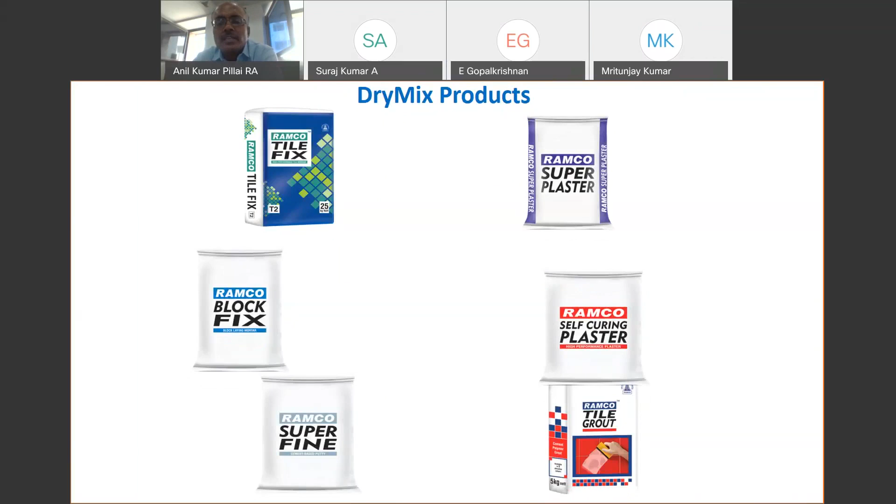And of course, we have the dry mix range of products. We have a dry mix plant at Sri Perumbudur, where we use various polymers and additives to ensure customized products are manufactured. We have Ramco Tile Fix, Ramco Super Plaster, Ramco Block Fix, Self-Curing Plaster, Tile Grout, and Superfine. Those are the dry mix range of products that we have got.

Of course, we have good interaction with various construction professionals. We have been associating with them on various projects like L&T. L&T is also executing our new plant at Kurnool, as well as they have completed our grinding unit at Odisha. That's how we are able to supply cement to projects which are exposed to different exposure conditions and which need different requirements.

That is why we always appeal to the construction professionals, that we need to understand what concrete we are going to use. Rather than limiting ourselves to the grade of concrete, we need to go into detail also - what is the workability required, what is the durability, can we measure the durability, because there are so many durability evaluating instruments available nowadays, like RCPT test and water permeability test as per DIN standard.

So those equipments can be made use of. And then we have ITD Cementation again, where we are associating with various infrastructure projects. So of course, Bangalore Metro Rail Corporation as well as other metro projects, our brand is approved, and various projects in the eastern part of the country we are catering to. So that is the kind of thing that we have got.

And we have got a research center at Chennai, because R&D being an important element, because we have seen that many construction professionals are facing problems at site. So what we do is that we do a number of concrete mix designs at our R&D lab, and try to help them out. Apart from testing various raw materials, various types of cements, and giving suggestions on how to make good concrete. Of course, the Four Leaves Award, which we have got for leadership in technology and energy efficiency, utilization of blending materials, and for those initiatives, we have got this award.

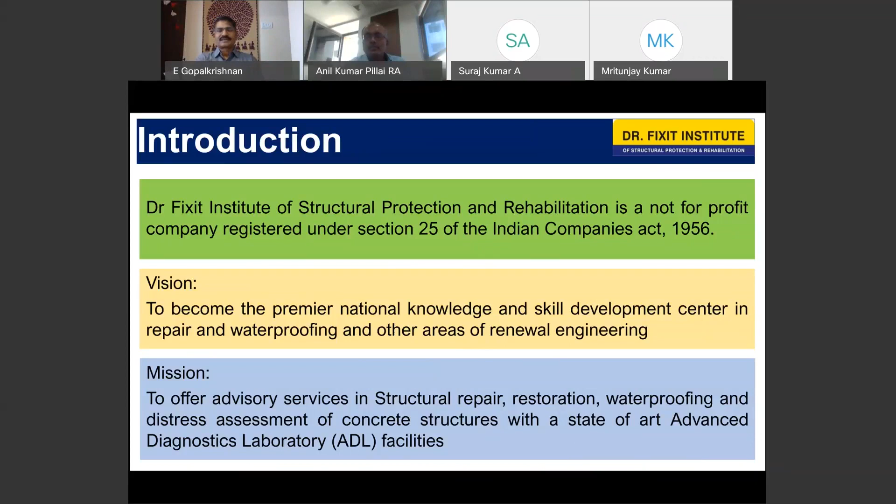What are the collaborative arrangements? We have a network nationally as well as internationally. Nationally, we have ICI and other engineering consultant chapters. Besides that, we have international association with the International Concrete Repair Institute USA, the National Roofing Contractors Association of USA, Concrete Institute of Australia, and Concrete Society UK. We share knowledge and techniques, what is developed and latest today, and we invite experts to assist us in special projects or deliver technical topics where our fraternity also gets advanced knowledge of what is happening across the globe.

We conduct petrography examination of deteriorated concrete. Non-destructive testing alone will not give much information, so petrography gives information on fire-damaged concrete structures or deterioration, the reason for deterioration, whether the matrix bonding is proper or not, and the mineralogy of the material used - everything we can identify through petrographic examination.

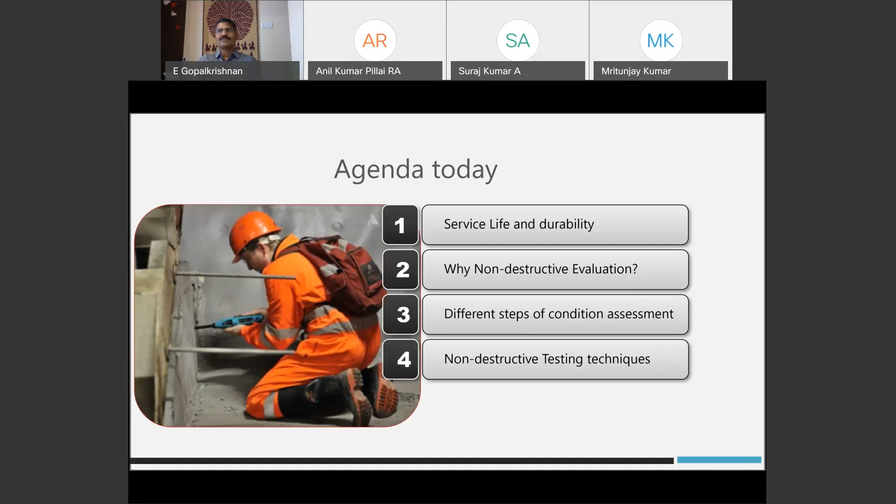Today we'll be discussing the service life and durability factors which affect buildings. Second, why non-destructive evaluation is required - because many of us still doubt, when construction is done with good quality and better workmanship, why we need evaluation? We are going to discuss that. Third, different steps of condition assessment of structures and advanced non-destructive testing techniques, their benefits, and some interesting case studies I've seen, which I want to share with you to complete our topic today.

The service life of a material can be assessed by the expected lifetime or acceptable period of usage. For a long time, concrete was considered a very durable material requiring little or no maintenance. However, many structures around the world have shown deterioration during the past 60 to 70 years.

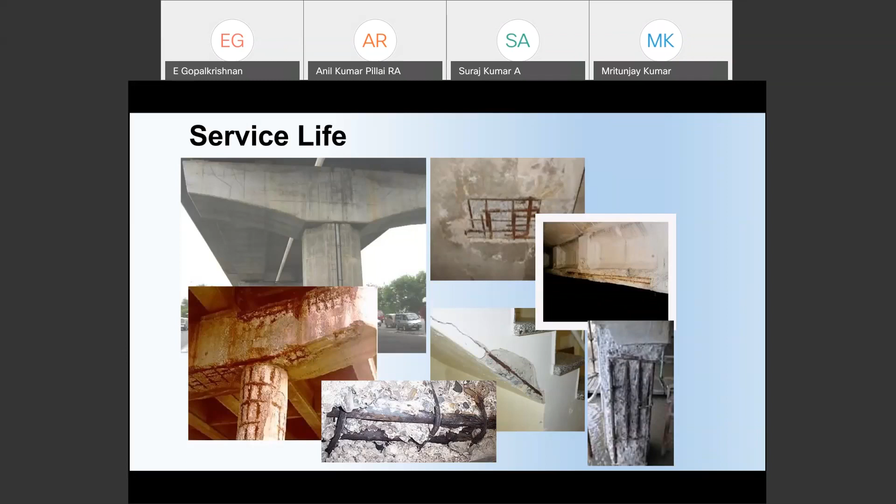What is the reason? Based on exposure condition, structures deteriorate. Different structures have different service lives. Most structures do not attain their service life because of poor maintenance. When talking about service life - without any major maintenance or repair, the building has to stand for its functionality. That is the service life.

What are the factors? As per IS 456, durable concrete is one that performs satisfactorily in the working environment during the anticipated exposure condition and during its service life. That was the definition given in IS 456.

Durability is affected by different parameters like carbonation, chloride risk, alkali silica reaction, freeze-thaw action, which is not applicable to our country. Durability is mainly related to corrosion, chemical attack, alkali silica reactivity, and delayed ettringite formation. We can say there is a multiple transport mechanism - hazardous chemicals like chloride, sulfate, or gases entering the structures along with moisture starts the formation of corrosion, etc.

The second point is selection of raw material - this is also very important, including the mixes and criteria to meet durability requirements. Also, we rarely check the actual structure specimens; we check a part of the sample collected and maintained in a cube under controlled environment. So that is also performance-based durability. We should think about that.

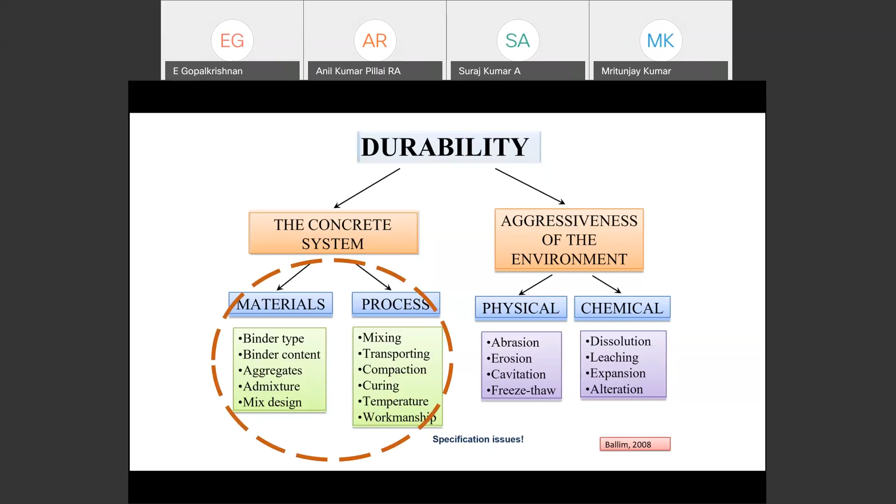But in spite of all the precautions and preventions, concrete deteriorates in severe and extremely severe exposure conditions. So while the root cause of deterioration needs to be ascertained, now I am going to show you the schematic stages of corrosion-induced deterioration of concrete structures. In this, I can bring out what the corrosion mechanism or deterioration mechanism is.

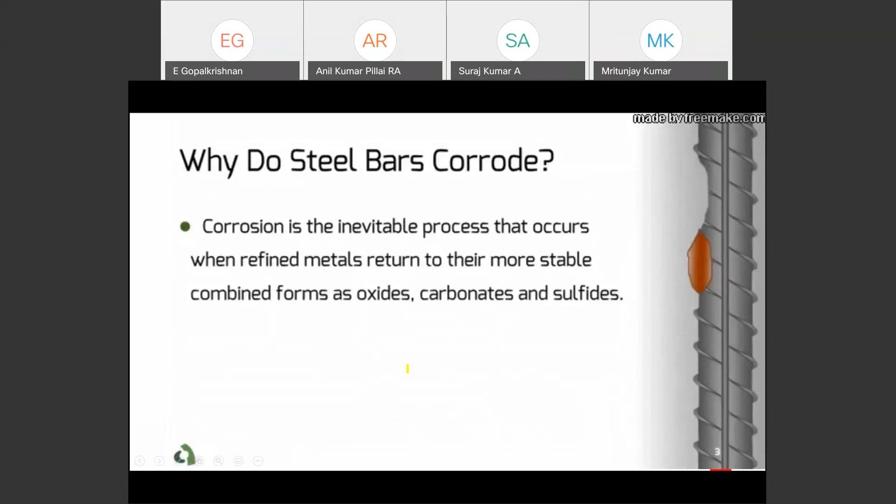Corrosion is a process or chemical reaction where refined metals such as steel and iron return to their more stable combined forms as oxides, carbonates, or sulfides. In this chemical reaction, a section of the steel material acts as an anode, meaning the steel loses electrons.

On the other hand, another portion of the reinforcing mesh acts as a cathode. At the cathode, oxygen combines with water and electrons to release hydroxide ions. This shows that the reaction requires both water and oxygen to occur. The volume of corrosion products, especially Fe2O3, is significantly higher than the original steel, which increases internal pressure and consequently cracks the concrete.

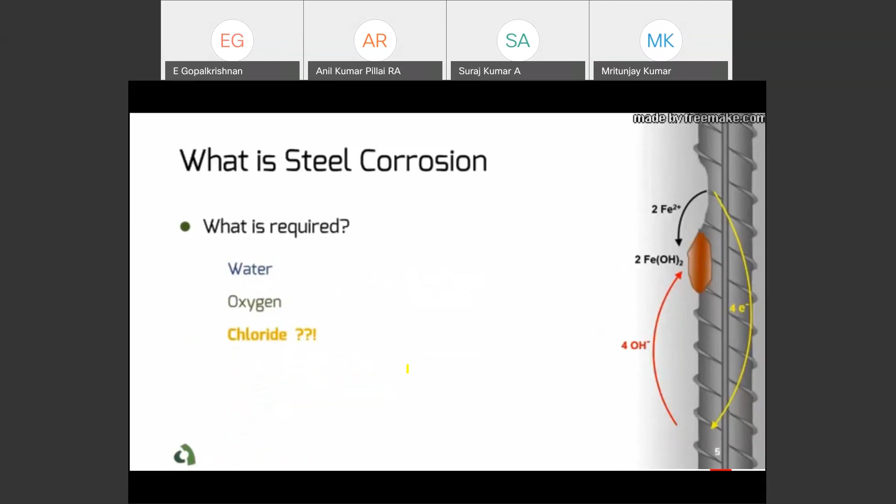We know that the availability of these three elements is essential for corrosion to happen - the reaction requires water and oxygen. However, experiments in real case scenarios show that chloride plays a key role in the onset of corrosion. Concrete provides a high alkalinity environment around the reinforcement. In normal conditions, one can expect this will protect the reinforcing bars from corrosion. At the same time, concrete is a permeable material, as moisture and aggressive ions can move through the pore structure of concrete.

The interesting question that arises here is the role of chloride ions in this reaction. This has been the topic of research for many corrosion specialists around the world, yet there is no definite answer. A basic explanation is that the ingress of chloride destroys the protective oxide layer on the surface of the rebar, which eventually destabilizes the protective film over the reinforcement, leading to the initiation of corrosion.

As mentioned earlier, the porosity of concrete makes it possible for ions to penetrate into concrete and makes the concrete itself act as an electrolyte. Corrosion happens in this environment, and the movement of electrons in concrete creates an electrical potential field inside the concrete over the surface of the rebar. For example, reactions at the anode, where steel loses electrons, can create a potential difference of negative 780 millivolts compared to a standard copper sulfate electrode. The cathodic reactions would result in a potential difference of positive 160 millivolts.

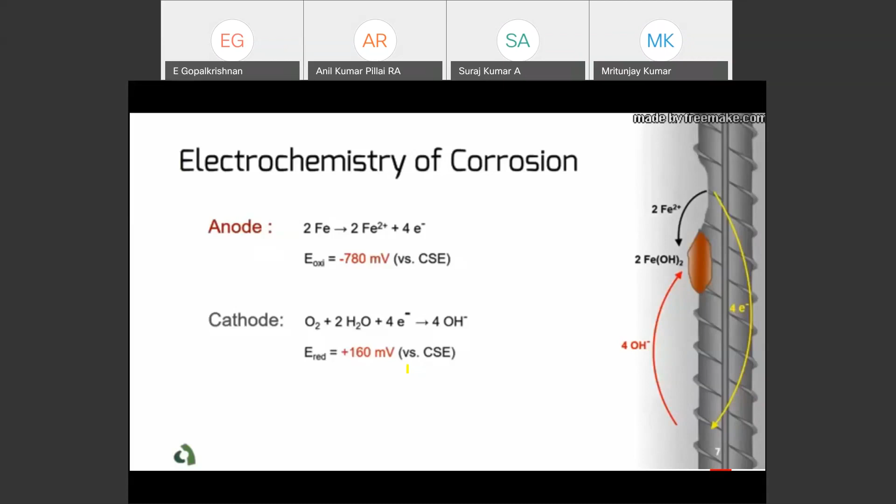The traditional way of investigating corrosion is visual inspection. However, when damage is detected in visual inspection, it is already too late. Signs of corrosion are often marked by delamination, which is the result of corrosion materials expanding. Visual inspection is often performed with chain dragging tests to identify delaminated areas. At this stage, there is not much left to do except repair.

Corrosion activity is often the focus of corrosion study. The first concept is the half-cell potential.

In this method, surface potential measurement is used to predict the probability of corrosion. While the test provides useful information about the chance of corrosion for the area under investigation, the results can easily become misleading if the potential effects of influencing parameters are not appropriately taken into account. Another limitation of the test is that it does not provide any information about the kinetics of corrosion reactions.

The second concept is the rate of steel corrosion. The corrosion rate is about the kinetics of reaction and how fast the corrosion is progressing in the concrete. This becomes important in the context of life cycle assessment, as it helps engineers better predict the remaining service life of a given structure. So let's talk a little about these concepts and measurement test methods.

The half-cell test can be used to predict the corrosion potential from the surface of concrete. Several associations have standardized the test procedure, including ASTM, UNI, and RILEM. In the half-cell potential method, the potential values at the surface of concrete are measured with respect to a reference point.

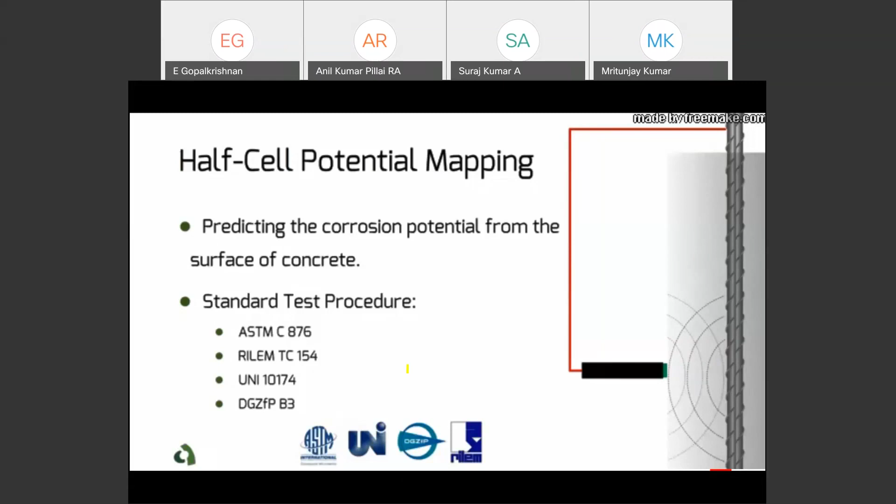The value is normally presented in contour plots, showing different half-cell potential values. This helps identify areas with a higher chance of corrosion. For example, ASTM C876 introduces 3 different ranges for the measurement.

Half-cell potential values less than negative 350 millivolts, measured in reference to a copper sulfate electrode, represent an area where the probability of having active corrosion is more than 90%. When measurement is higher than negative 200 millivolts, this probability is less than 10%. Results for half-cell potential values between negative 200 millivolts and negative 350 millivolts are uncertain.

We have seen what corrosion is and how it's affecting the structures. Now let us see the assessment of structures today. There are different types of assessment: strength assessment for assessing the concrete strength, durability assessment for identifying the nature and extent of observed or suspected deterioration related to reinforcement corrosion, and integrity assessment for determination of localized integrity of the structure or generalized assessment of behavior of old structures.

For the old structure, we can assess the integrity of the structure, what is the status of the condition, etc. There are 5 steps of condition assessment.

One, we conduct a detailed visual inspection. What is the deterioration shown? What are the cracks? What different deterioration is happening to the structures? And the second one, based on the visual inspection, we identify what NDT is required.

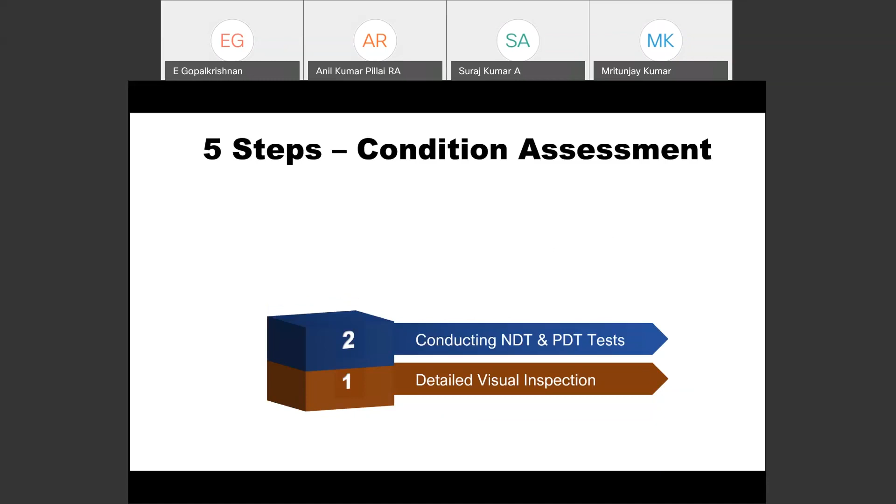NDT is always a group of NDT tests, to give information about the structure which is not visible. So some non-destructive tests and partially destructive tests are also conducted, like taking a core and other tests which are partially damaging. And whatever sample is collected, we conduct some chemical analysis and lab tests and interpret the results of the non-destructive evaluation.

Finally, we prepare the report with recommendations, including the severity of the deterioration and what strengthening measures are required. In totality, with the rate analysis, we submit to the customer so the client comes to know what the problem is and what budget needs to be allocated. So everything is there, and they can successfully repair those particular structures to extend the life and durability. Okay, this is all the condition assessment.

Let us go to non-destructive testing. Recently, non-destructive testing is most frequently used for evaluation and condition assessment of buildings. The non-destructive evaluation of civil engineering structures in reinforced concrete is becoming an increasingly important role in the field of structural engineering.

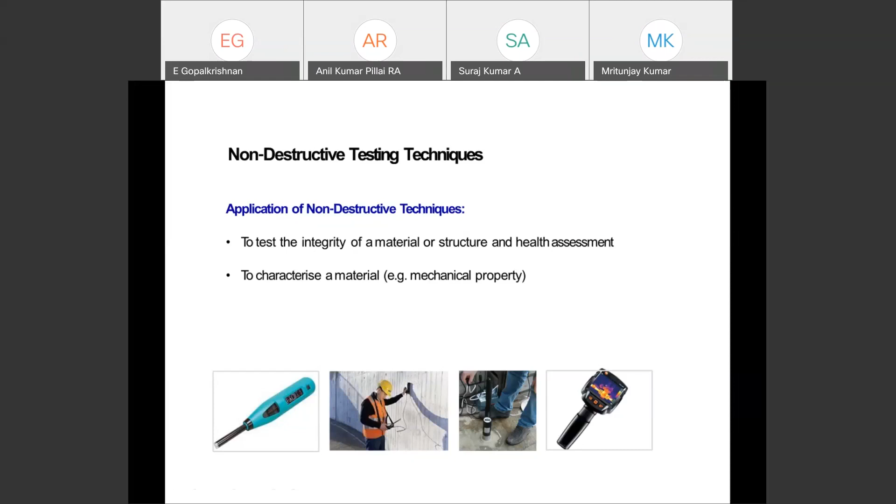For assessing the integrity of material or conducting health assessments, we use several non-destructive testing methods. I'm going to explain these. We will review the potential options and practical solutions for on-site evaluation of concrete strength in RCC structures. The rebound hammer, as you all know, is one of the very simple and low-cost tests, which is most widely used in non-destructive testing of concrete.

As you know the principle, if you hit a hard, dense surface, you get a higher rebound number. When you have a rough surface or a soft, porous surface, you get a low rebound number.

The operation is shown here, so I'm not going to take much time on this. When you get the reading, you can see the rebound number on the sliding scale, so we can report the rebound number.

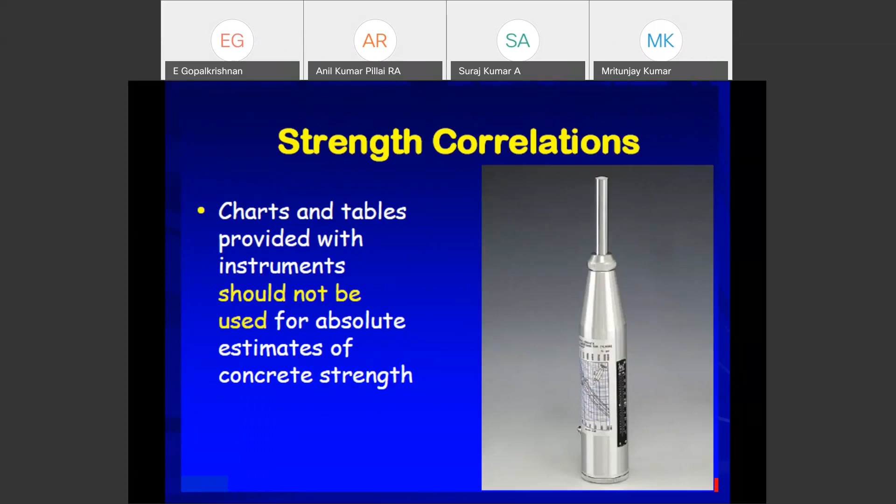The chart and tables provided in the instrument should not be used for absolute estimate of compressive strength. With traditional rebound hammers, we need to correct the angles, horizontal, vertical down, vertical up, to have the correct rebound number values.

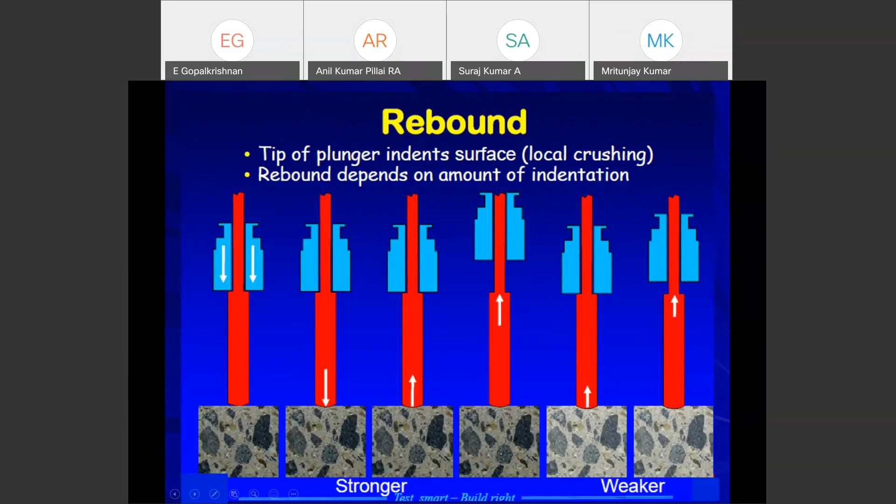It depends upon the stronger surface. You can get a higher rebound number because of the indentation, and a weaker surface gives a lower reading. Normally, we take the average of 6 readings and report as the rebound number, because it's affected by several factors: surface condition, presence of rebars, and presence of subsurface voids can affect the result. Even a carbonated dry surface can get a higher rebound value compared to normal. We need to understand this while interpreting the results.

Just running the video so we can cover this. In this video, we'll be covering a quick review of the rebound hammer testing method.

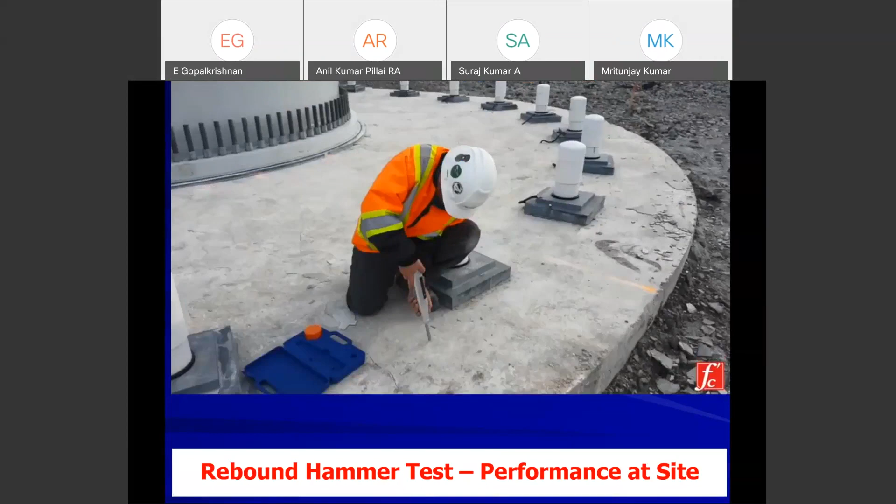Since its introduction in 1948, the rebound hammer has become extremely popular, mainly for its simplicity and ease of use. It is an inexpensive and quick method for non-destructive testing evaluation of concrete hardness. The main applications for the rebound hammer are to assess the in-place uniformity of concrete and to estimate the in-place strength of concrete if a correlation is developed.

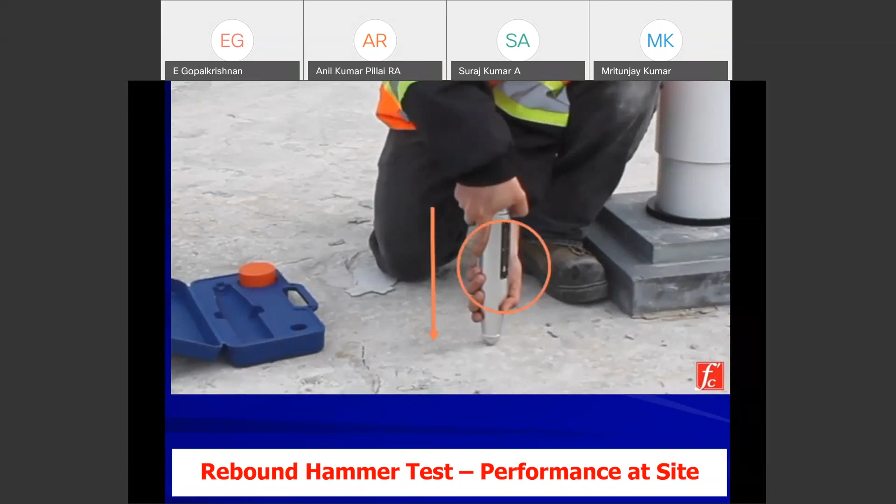In order to test, the plunger is pushed against the concrete perpendicular to the surface. As the hammer body is pushed towards the concrete, the force causes the latch to release and make an impact on the concrete. Essentially, the rebound is measured.

After its impact with the concrete surface, the output of the rebound hammer is then referred to as the rebound number, and this is correlated with the surface hardness of concrete. A higher R number means higher concrete hardness.

The rebound hammer can be placed in many configurations, including upwards, downwards, at any intermediate angle, and horizontal. Inspectors should pay attention to the following considerations prior to conducting a rebound hammer test.

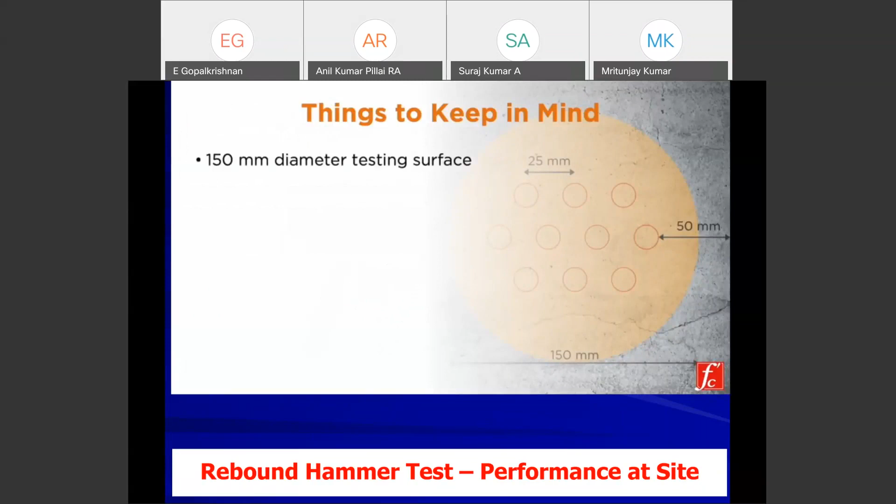The testing surface should be at least 150 millimeters in diameter. The surface should also always be smooth before testing. If there is any free moisture or water on the concrete surface, it must be removed. And finally, it's important not to test on frozen concrete, since frozen concrete tends to have high rebound numbers. Concrete should only be tested after it has thawed.

Although the rebound hammer provides a quick, inexpensive means of checking the uniformity of concrete, the results can also be affected by the following parameters: smoothness of the test surface, size, shape, and rigidity of the specimens, age of test specimens, surface and internal moisture conditions of the concrete, type of coarse aggregate, type of cement, carbonation of the concrete surface, and type of mold.

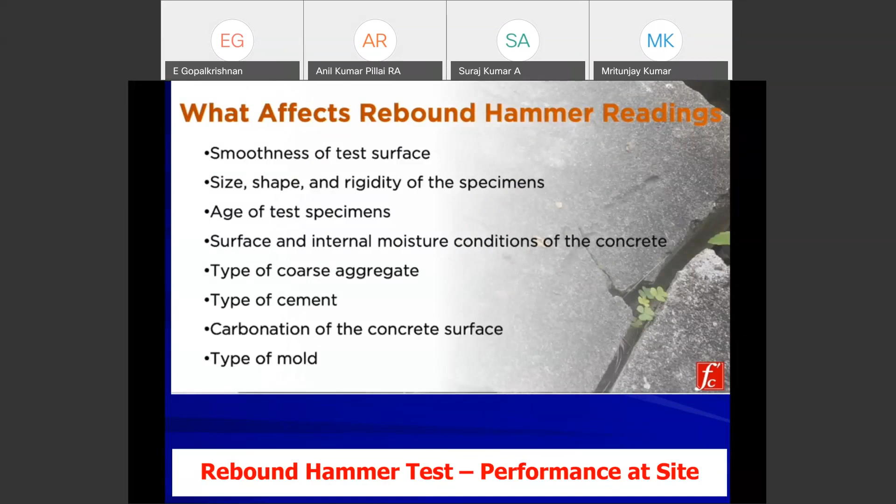With recent advancement in sensor technology and development of wireless communication, a new generation of rebound hammers are commercially available. Recording and tracking job-specific details, including hammer angle and on-site verification of test results, was time-consuming and prone to errors. The new generation of hammers help engineers get around these issues. For example, new generation hammers apply real-time checks on the quality of datasets and do not need to be adjusted for the configuration of the hammer.

In this video, we heard about the new generation hammers, since everybody is familiar with the basic test. There is a Silver Schmidt, which is a new latest development that gives the Q value. There is a difference between this and the R value, which you used to get in the conventional instrument. So for the same concrete, the Q value is not equal to the R value.

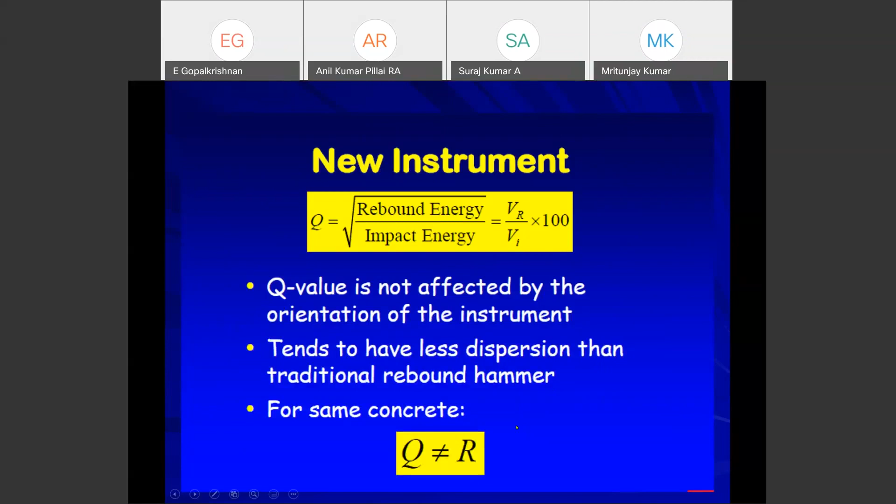When you compare the latest one, both correlate to the compressive strength. However, the original Schmidt hammer can measure 10 MPa to 70 MPa, whereas the new one can measure 5 MPa to 100 MPa, increasing the lower and higher limits by 50%.

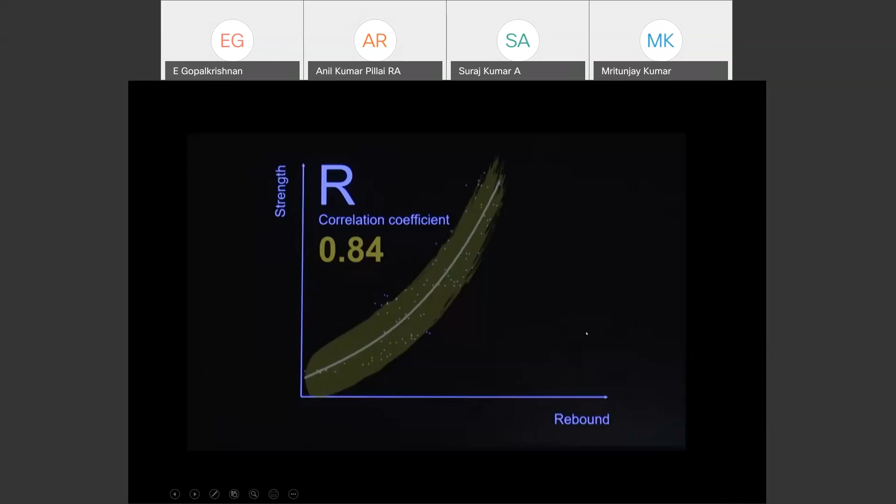Now, what is the coefficient of correlation? 0.84 for the silver Schmidt, and we can see that the latest Q value will give a 0.97 coefficient of correlation compared to the R value, which is 0.84.

Overall, this rebound hammer minimizes the total number of cores taken, so that we can assess the quality of the concrete, and also ensure that when collecting samples in representative and investigated structures, we get the correct information. This we can do quickly and non-destructively using the rebound hammer.

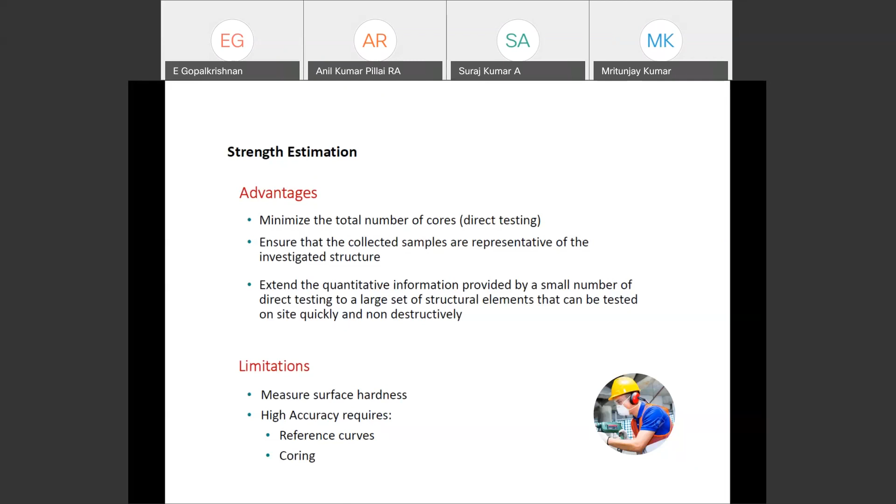The limitations are there. We need to assess the surface hardness only, and it gives high accuracy results when you have the reference curve, or from core samples we can get a closer prediction of the compressive strength.

Next one, the ultrasonic pulse velocity is another interesting method. It works effectively for quality control of concrete material and detection of damage in structural components. This has traditionally been used for quality control of material, mostly homogeneous materials such as metal welded connections. With recent developments in transducer technology, the test has been widely accepted in testing concrete material also.

The principle, you all know, is usually applied in a concrete element to understand the uniformity of the concrete and detect damage in the structural component. The ultrasonic testing of concrete is an effective way for quality assessment and uniformity, and it can also be used for crack depth estimation, which I am going to talk about today.

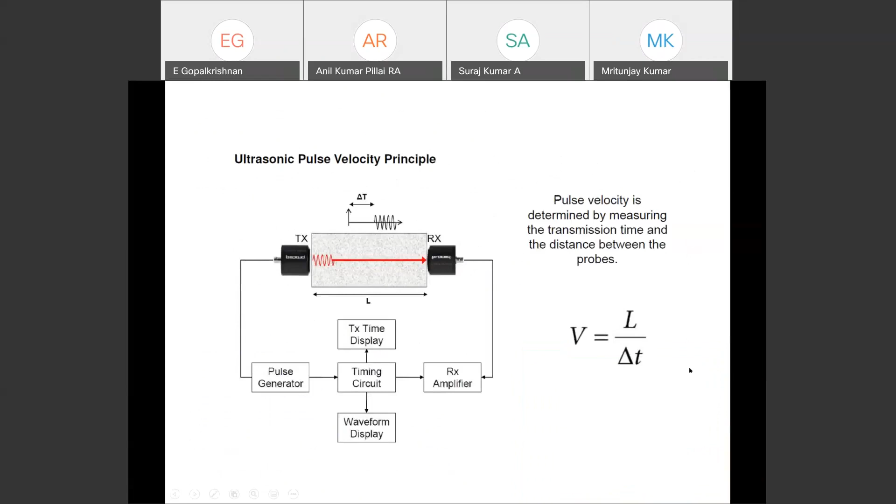The principle is through the transmission time, measuring the distance between the probes, giving the distance over the travel time, giving the velocity reported in kilometers per second. It's used for detection of voids, cracks, and other internal imperfections or defects, and for estimating mechanical or structural properties of material such as porosity, density, strength, or elastic modulus.

There are different types of testing arrangements: direct, semi-direct, and surface probing. Surface probing is not an easy thing to interpret; only advanced users are able to interpret the surface probing results.

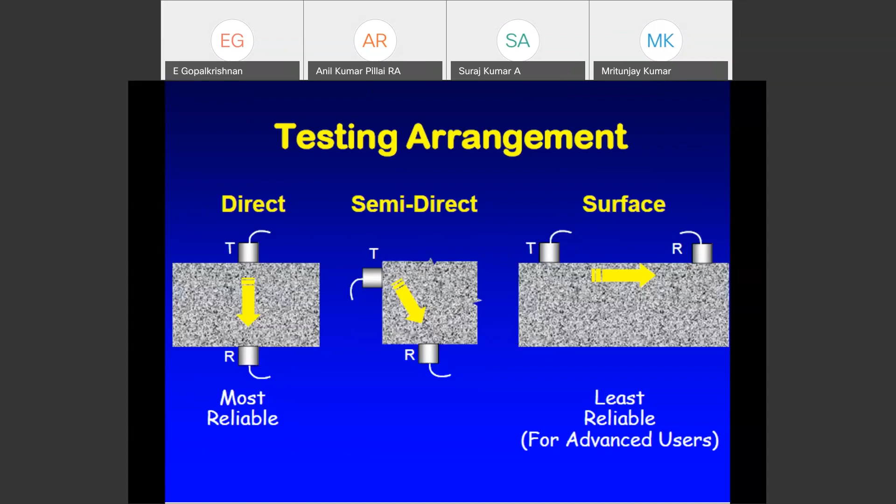Presence of defects increases the travel time, resulting in a lower computed speed. Like when honeycombing is there, the travel time is higher, so you get a low velocity. When a crack is there, it is not going to show, or it will not give any reading at all when the crack is thrown through. So we need to understand the defects through this testing.

As per IS 516, the latest revised code, above 4.4 km per second is excellent, below 3 is poor. Now we can see two examples: the high quality concrete, where the surface is smooth and dense, gives a high pulse velocity above 4.4 km per second. The poor quality concrete, where voids and honeycombs are present, gives a velocity lower than 3.0 km per second.

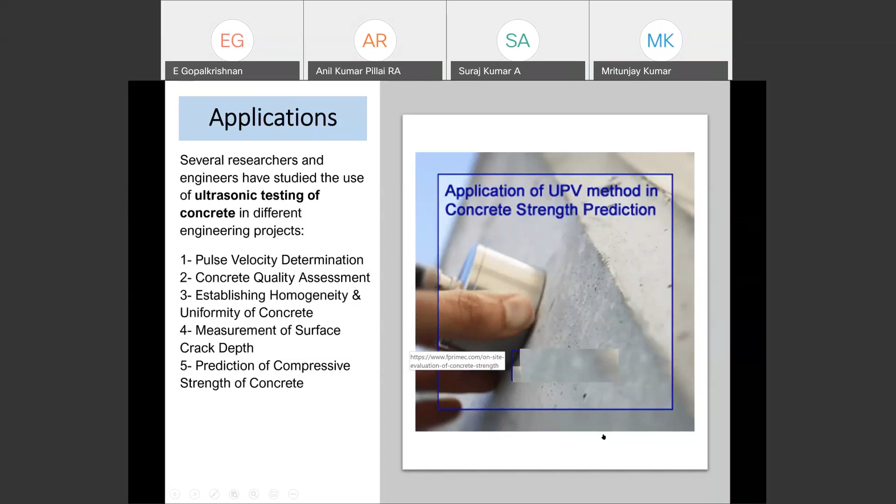Its application is not only pulse velocity determination; it can be used for quality assessment, homogeneity, uniformity of concrete, measuring surface crack depth, and prediction of compressive strength of concrete. We can use it to understand these parameters.

The evaluation of cracks: usually crack width is used to assess the severity of the cracks, whereas crack depth is used to evaluate the overall structural integrity of the element.

So one is understanding the crack: when we use a simple crack width measuring scale, we can see what the crack width is. What about the depth of the crack? Crack depth measurement can help repair contractors in evaluating the repair cost, and site engineers also rely on different institutional methods of non-destructive testing to estimate the crack depth.

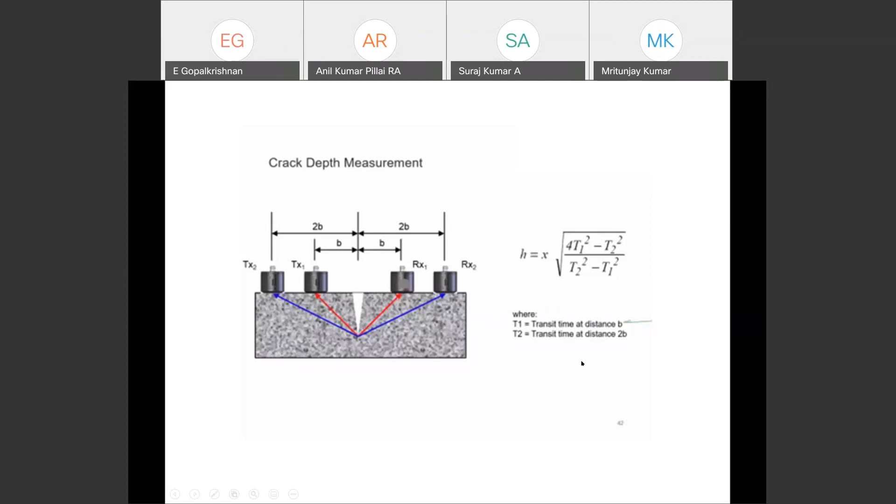There are two methods used. This is a way we can measure the crack depth, covering the transit time between points above the crack - the travel time to distance B and 2B. We use this formula. For a better understanding, I can show an audio-visual to help you understand it much easier.

One approach is simply extracting the core and visually examining the core holes and core for the possible cause of the crack. In another method, we use NDT, like ultrasonic pulse velocity, to understand or measure the depth of the crack, for determining cracks.

We're just going to have a quick look at determining depth of crack in concrete. Able to see the probe - we are able to see. The probe is used here to measure the depth of the crack. Let us have a look at it. Measurement mode.

Now there's a number of selections here, because we've selected crack, so we're already in that mode. Here's dimension B, which is 10 centimeters, 100 millimeters. That's how far we are either side of the crack, and twice that. So this is 100 millimeters and 200 millimeters, or 10 centimeters and 20 centimeters. There's our 10, 10, 10, 10, etc.

So I'm just going to put some couplant on the ground in line with this. Let's put a coupling, and a bit of coupling with those spacings. Now I need to make the first measurement here. I'm going to put the two transducers, one transducer there, one transducer here. They're not actually on the tape, they're just next to the tape. I think you'll be able to see how the transducer is placed.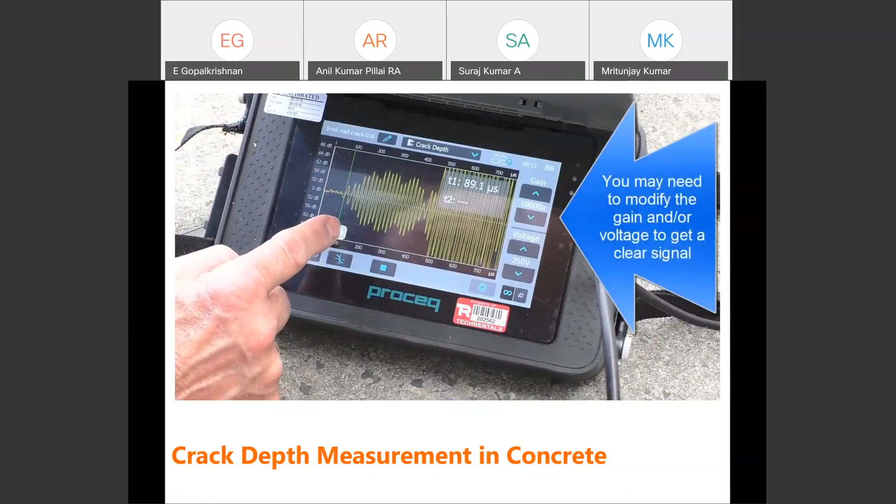First I'm going to hit play. Here, this is auto mode, where it automatically jumps and automatically finds it, etc. Now I'm going to just move that, because I can see quite clearly that the signal is actually received. It's actually there. So I'm going to select that.

Now, next thing I'm going to do, I'm going to jump to the second set of measurements. So I'll move my two transducers there. Yeah, we can move further away. And take parallel readings. There.

Now, two measurements. We now hit this play button again. Now this isn't jumping. Oh sorry, hang on, I just hit something by accident there. I need to go back out. I hit zoom in and hit that plus button. So I'm going to set it back to auto mode.

Now, it's jumped to that spot, but I can see quite clearly that the nice clean sine wave starts a little bit earlier than that. So I'm going to move it back, and I can actually see the sine wave is really just starting there. I can see that pretty clearly. So now I hit finish on that, and it's got a crack depth of 44 millimeters. So it's that simple, that quick to find your depth of cracks in concrete. Nice little instrument, thank you very much for determining that.

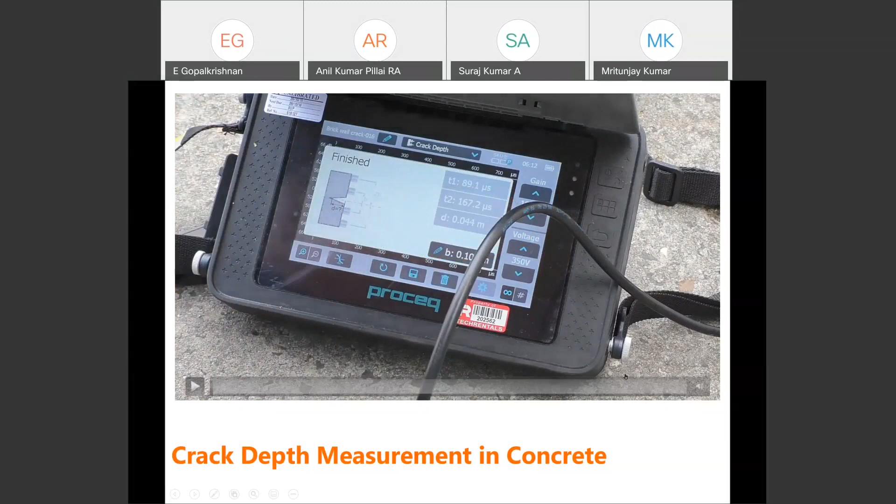So the crack depth is not typically uniform throughout the length of the crack. You can see there is a zigzag pattern. So we need to measure at different intervals so that we can take an average to understand the crack depth of a particular crack. You can see there are different points. We are measuring at each point so that we can have an average that will represent that particular crack.

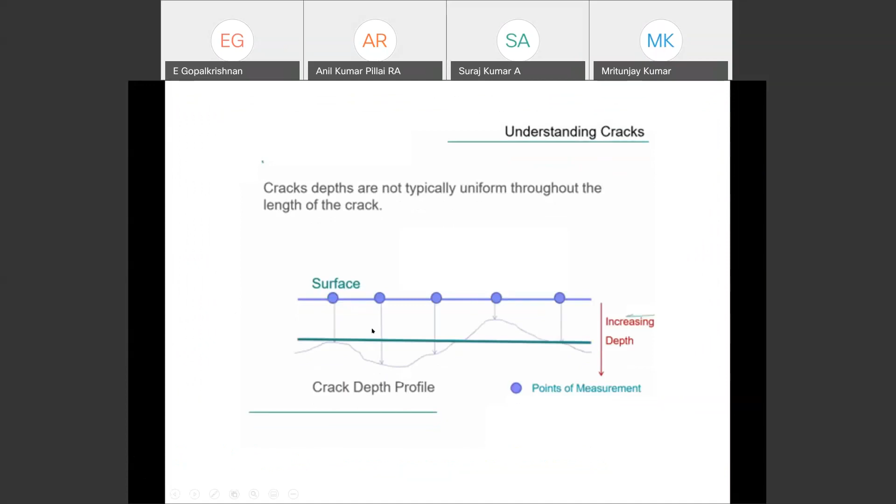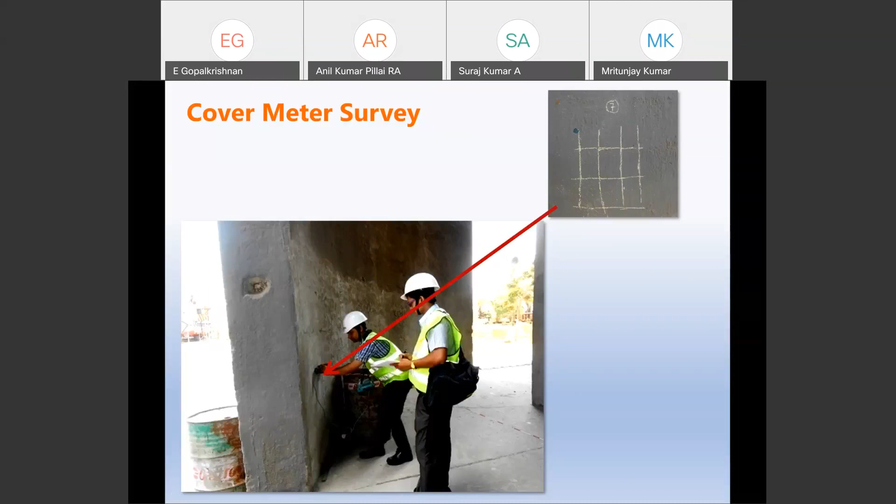Now, second one, we are talking about the cover meter, which usually works on the eddy current principle. It measures the cover, and also detects the rebar diameter and locations. This is one of the measurements we can make where no drawing is available. We use the cover meter to identify the rebar position and the thickness, size of the rebar, which will definitely help give protection to the structures without cutting it open. So the advantage is it can measure the accurate cover and estimate the rebar diameter.

What are the limitations? There are limitations. Yes, only the top layer can be detected. In congested areas we may not be able to identify the exact thickness. These are limitations we should understand.

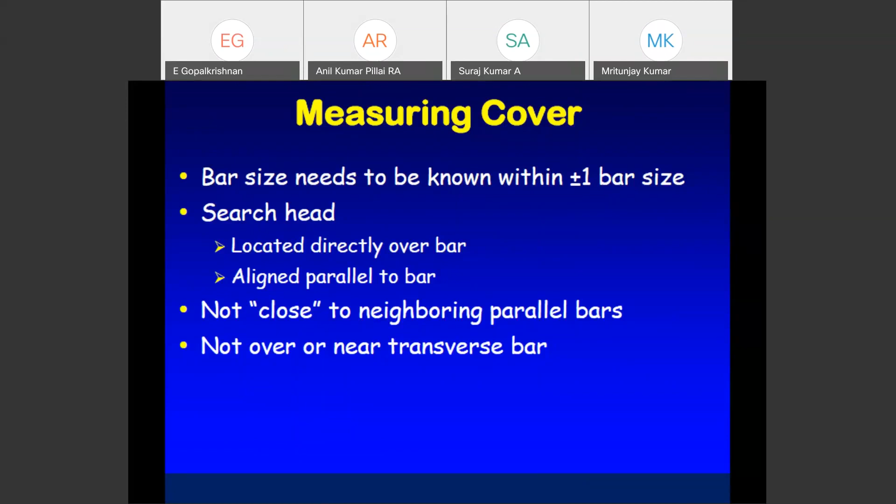So when you are measuring, the bar size needs to be known within plus or minus 1 bar size. And you need to keep the sensor of the equipment directly over the bar, aligned parallel to the bar, not close to parallel to a neighboring bar, or near a transverse bar. It will give misleading results.

The next one: when you are doing the assessment of the structures, we conduct the carbonation test, which is a very simple test.

So whether the carbonation level reaches the reinforcement, or what is the depth of the carbonation - simply we use the phenolphthalein indicator to try to do that, and also check the pH, as a chemical method, to see whether the status of the carbonation has started or not. This will help to strengthen the finding through the carbonation.

When the pH drops below 8.5, the passive iron oxide film breaks down and rapid corrosion occurs in the presence of moisture and oxygen, as you know.

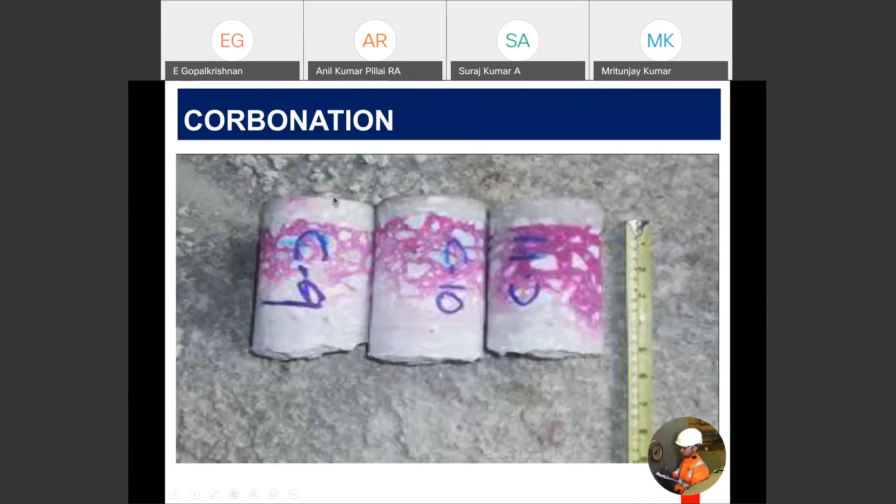So we are trying to measure the carbonation. When you take the core from the particular structure, we can measure which area's color has turned, while the rest of the area shows pink. From the surface, we can measure what is the depth of carbonation from the surface, and we report.

The important aspect is corrosion. Corrosion is commonly observed in existing reinforced concrete structures. When performing structural or condition assessment, engineers need to find proper answers to questions like: what is the current state of the structure? What is the rate of corrosion happening? What is the remaining capacity and service life? It all depends upon the corrosion activity.

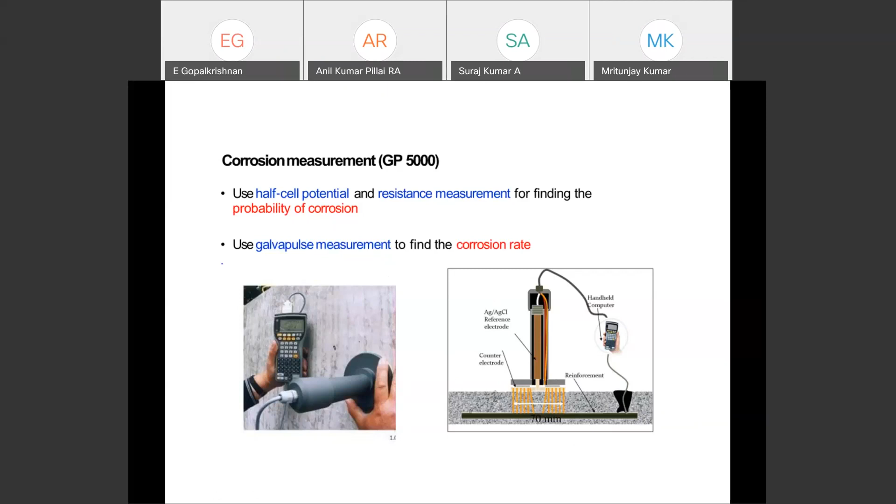We use corrosion measurement using this GP 5000. It gives the half-cell potential reading as well as the resistance measurement to find out the possibility of corrosion and also to find out the rate of corrosion. So this is the information we can get. Here, normally the half-cell potential electrode uses a copper sulfate solution, but here we are using silver chloride, which allows a more accurate assessment to be made.

So we are measuring the corrosion rate or half-cell potential of the reinforcement embedded in concrete. Using the pulse polarization technique method, we can find out the actual corrosion rate and the time of testing, so that we can assess over time what is the corrosion and what is the increasing rate of corrosion. We can then make the actual repair plan or protection plan based on understanding the rate of corrosion.

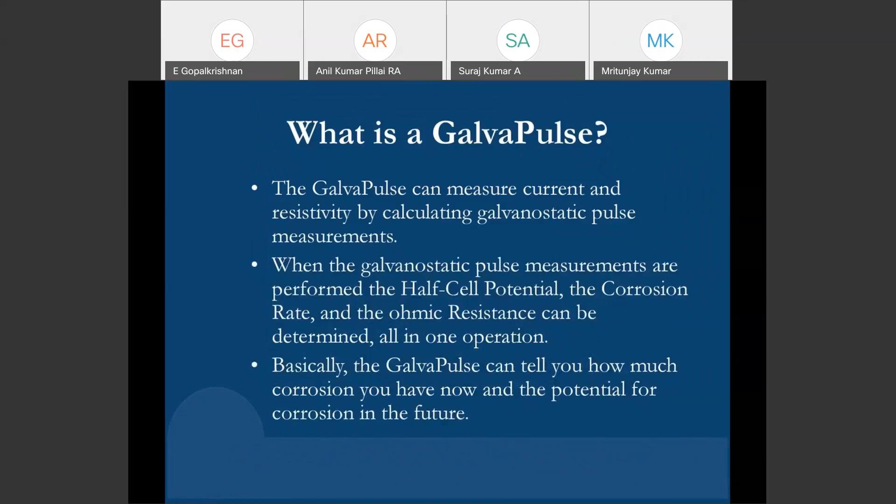This measures the corrosion rate and half-cell potential. Based on that, we can predict the lifetime of the structure - we call it the residual life of the structure. We can proactively extend the service lifespan when protecting from corrosion.

So the key parameters involved in corrosion rate estimation include the concrete material, rebar condition, humidity, and temperature. Using all this information, lifetime prediction of the concrete can be made.

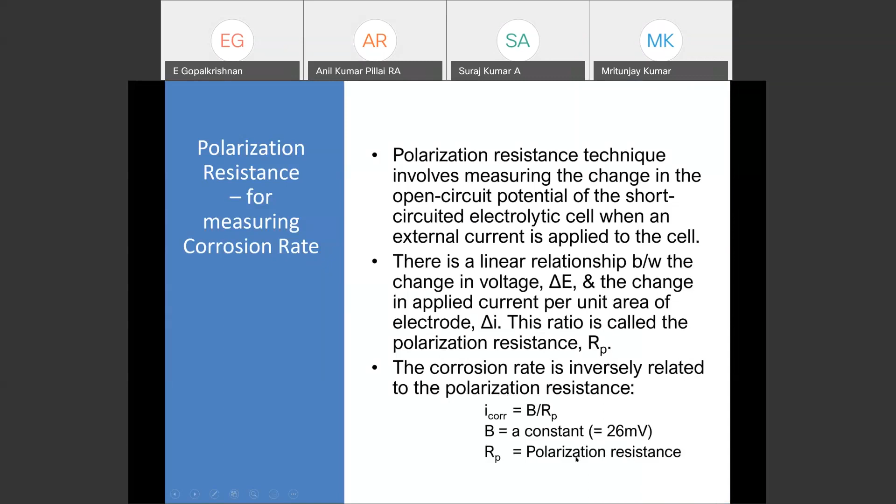This technique uses linear polarization resistance, the relationship between the changes in voltage and the changes in applied current per unit area of electrode. This ratio is called polarization resistance, RP. The formula given is I equals B divided by resistance polarization, where B is a constant and RP is the polarization resistance. We can use this formula.

The Stern-Geary corrosion rate relationship is I equals B divided by RP, in microamperes per centimeter square. B is typically 26 to 52 millivolts. Using Faraday's law, we can translate this to find the i corr: 1 microampere per centimeter square is equal to 11.6 micrometers per year.

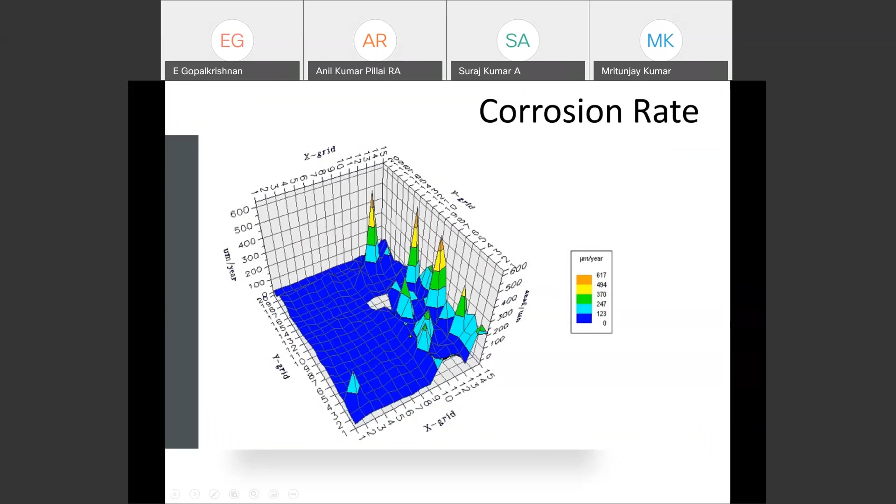So we can understand what is the corrosion rate, potential differences, as well as the amount of resistivity present in the particular structures.

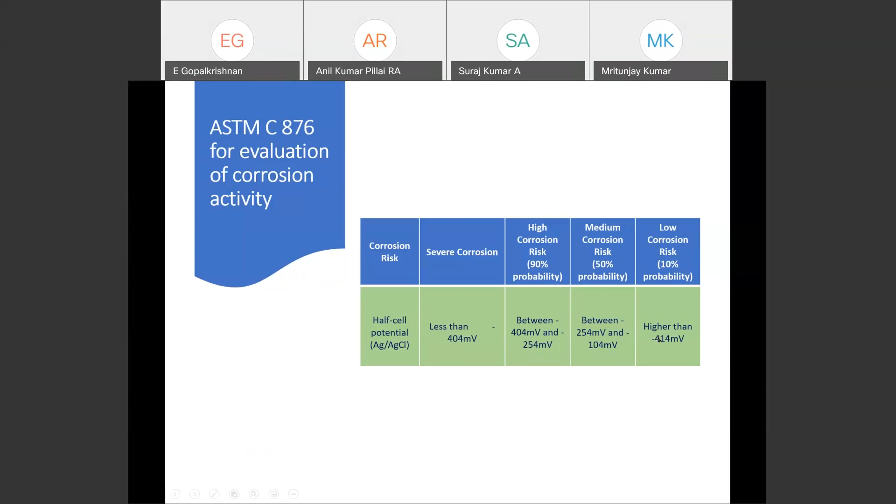There is an ASTM C876 giving the interpretation. It says severe corrosion means less than minus 404 millivolt. Low corrosion risk, 10% probability, is higher than minus 104 millivolt. It has a 10% probability of corrosion.

Based on the relationship, we can predict the residual life of the structures or corrosion-induced deterioration.

The application gives the service life estimation to understand what measures need to be taken to prevent deterioration at an early stage, and it evaluates the efficiency of corrosion arresting measures such as application of corrosion inhibitors, membranes, and electrochemical removal of chloride from the structure elements.

Condition survey of suspected RCC structures, monitoring corrosion activity in RCC structures, and measuring corrosion activity in the repair areas. Once you have the corrosion, you do the protection of the rebar and finish with the repair. After some time, you can check what corrosion activity is happening through this instrument.

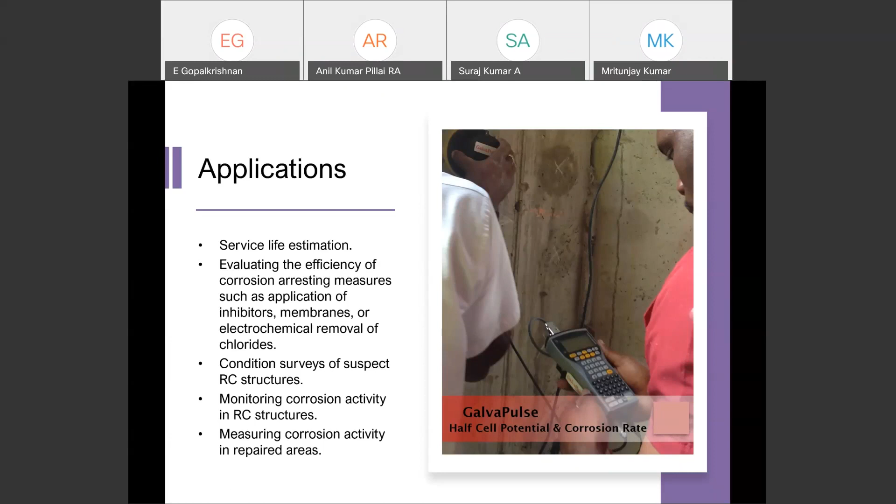We are going to talk about in-place strength without testing core. Nowadays, when there's a structure failure or any doubts, when the cube failure happens in the lab, what do we do? Immediately we order core testing. We take the core from different parts of the structure and try to do the testing. Many times we don't get a conclusion because core testing also involves several parameters affecting the results.

Extracting core, first of all, is destructive. And it not only damages concrete integrity, it might affect the reinforcing bar in RCC structures. So try to avoid the core. Taking core always has potential damage to the structures. Unknowingly, you can cut the rebar also.

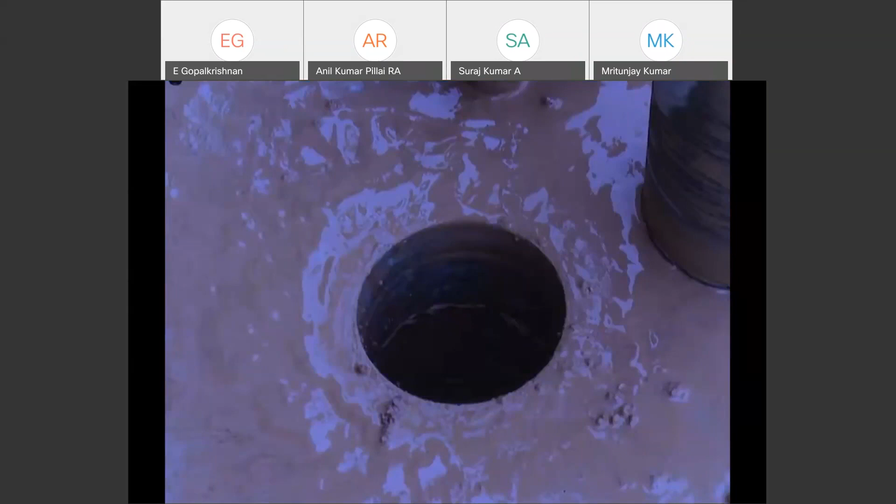Here I am giving the comparison of the duration for core testing. First we do the drilling of the core at site, then trimming the core, capping, then curing it for 48 hours before testing and crushing for strength, which almost takes 1 week.

Whereas when you do the cut and pull-out test, you only have to do the field test. It's going to take around 25 minutes to get the compressive strength or in-situ strength of the particular concrete. So it will be easy and give more accurate results, with no need to rely on cutting, trimming parallel to the core, or whether the curing is done properly. On the actual site, we can get the in-situ strength within 25 minutes. This is the advantage of this method.

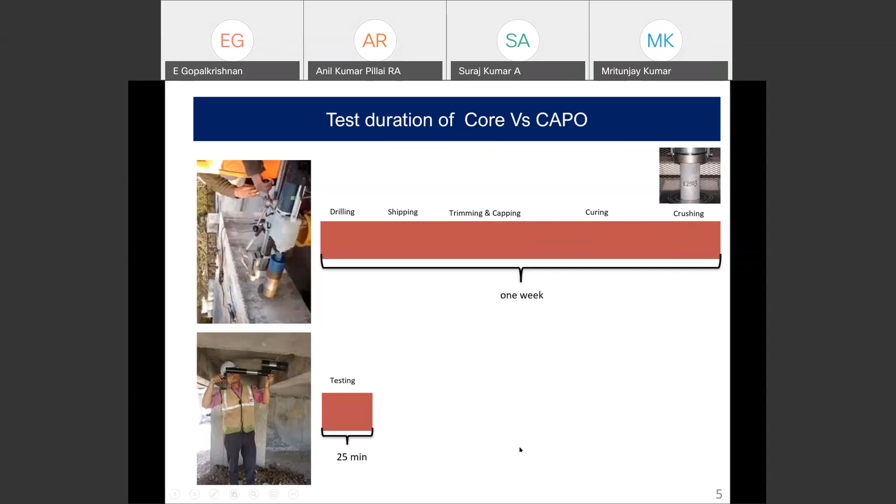Let us understand: normally when you measure in-place properties of concrete, you ensure the structure will perform as intended, and for that we need to understand the strength. Testing by core definitely takes many cores, time, and cost. Alternatively, we can do rebound number, probe penetration, or ultrasonic pulse velocity, but all these require correlation. Otherwise we do not get the actual compressive strength, so we only get an indication, not the actual value.

Better is we can use the pull-out test. We are able to get a more accurate and reliable estimation of the in-situ strength. As per ASTM C900, we can measure the force of pull-out of an insert anchored in the concrete. So we can do the cut and pull-out test.

It does not require pre-planning of test locations. It can perform the test at any accessible location. It permits testing of existing structures, with immediate results, as I showed in the first slide, compared with core testing. This is all the advantage.

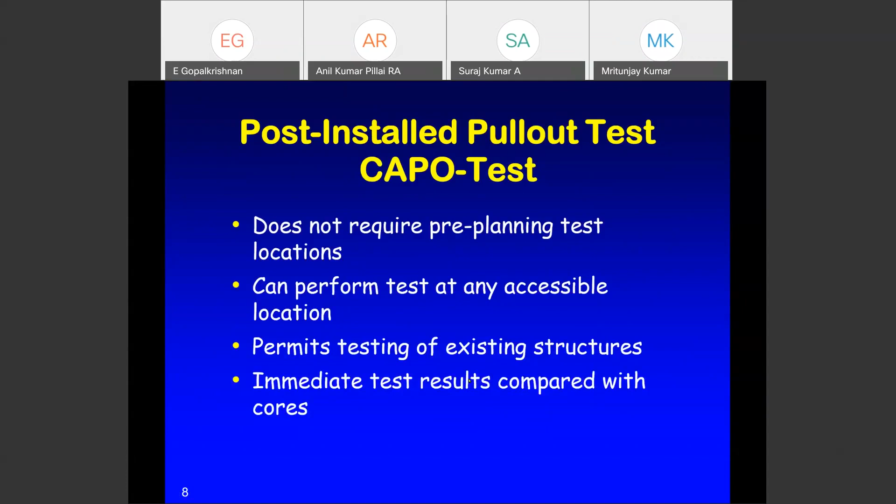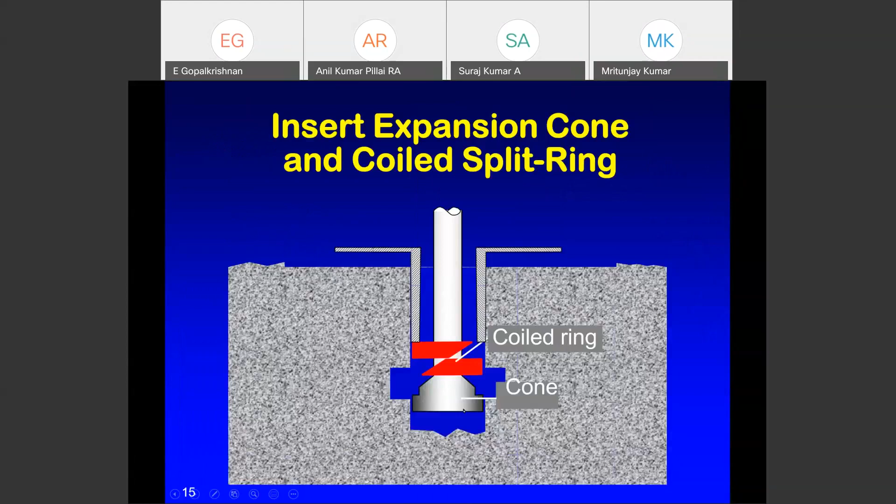I can show you the preparation of the concrete: drilling an 18 mm diameter hole, almost 65 to 70 mm deep. We insert the ring in the special slot. Surface preparation is done with a diamond edge drilling machine to achieve a smooth surface. Then we prepare the special slot with a special drill given for that, where we fix the coiled ring, which is going to expand. This coiled ring looks like that.

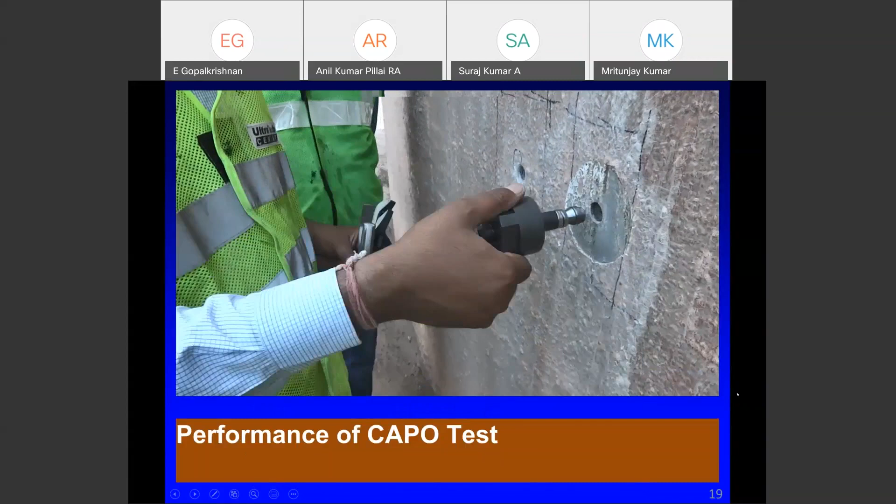We can pull it out. When pulling out, we get a break in a V-cone shape. Now I am going to show you how the test has been done in the field. There is no audio, so no need to listen for audio - we can just see the video.

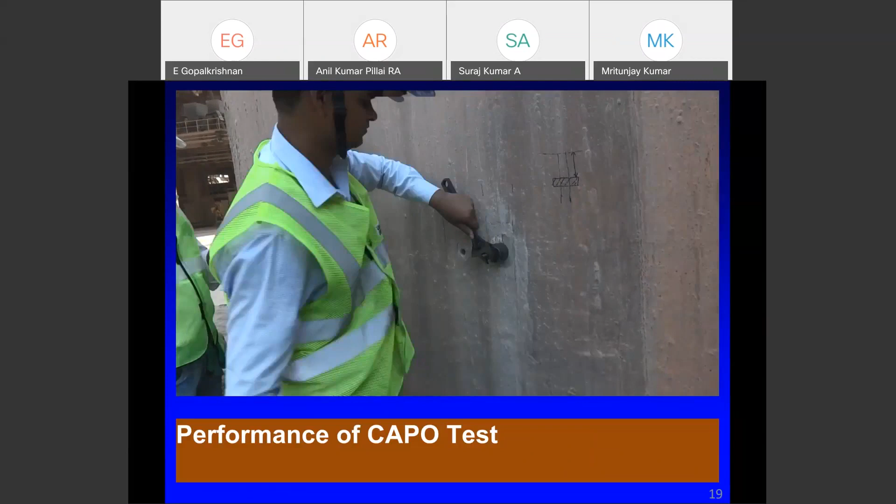The concept behind this pull-out test is the tensile force required to pull a metal disc together with a layer of concrete on the surface to which it is attached. That is related to the compression of the concrete. We are going to convert our pull-out force to the compressive strength.

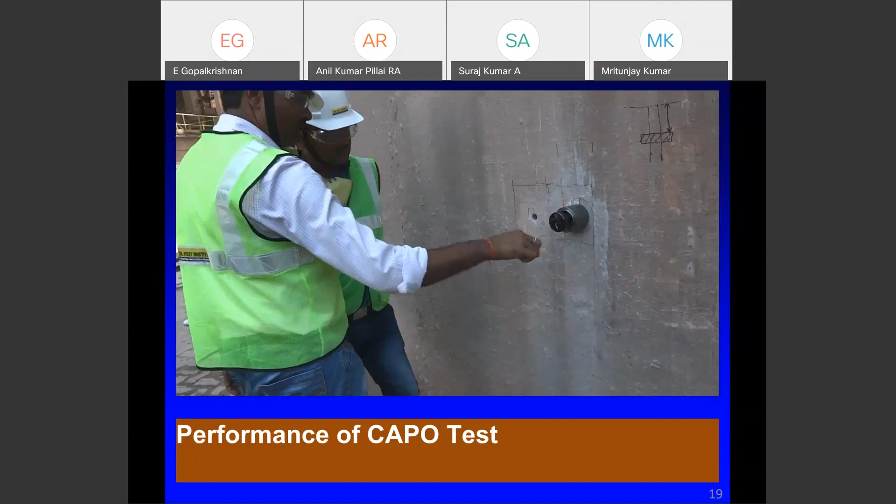Relatively easy to use. If a relationship is established, the method can deliver robust test results. We have been successfully using this in many projects.

Even nowadays, for buildings and residential buildings, consultants prefer to have pull-out tests because the damage is very minimal compared to core extraction. Nowadays we are working on lean structural members, so the core test is difficult. That's why this test is being preferred in these locations.

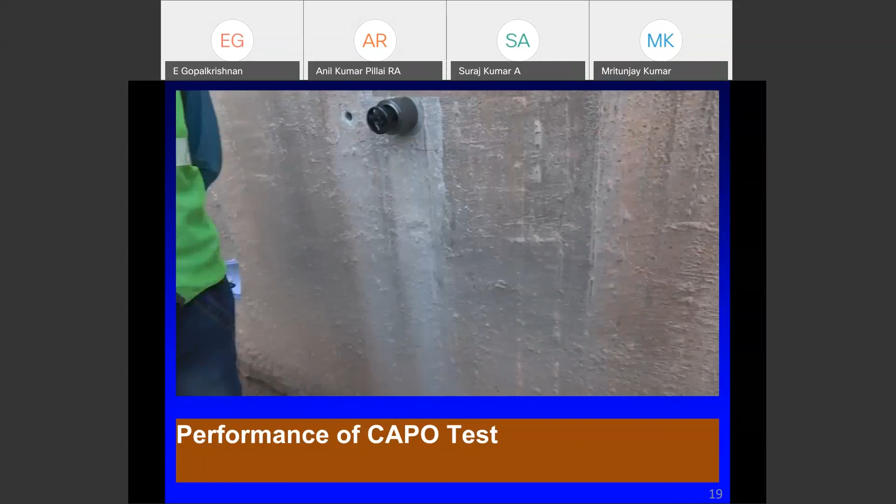Now it's showing 0, it's set to 0 now, and we are going to apply the force uniformly. What's happening is the ring which is inserted gets expanded slowly, and ultimately it will break. The ultimate force is recorded in the instrument - the pull-out force.

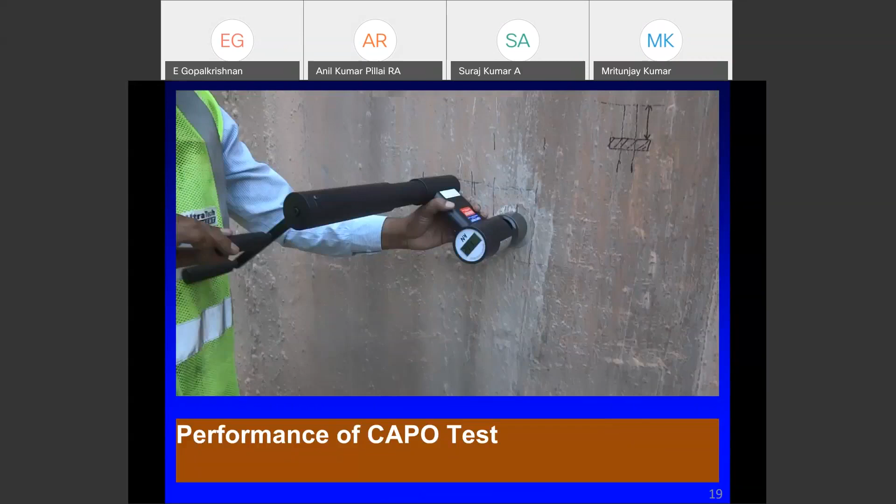So we have to apply the force carefully, uniformly. That is very, very important to have more accurate results.

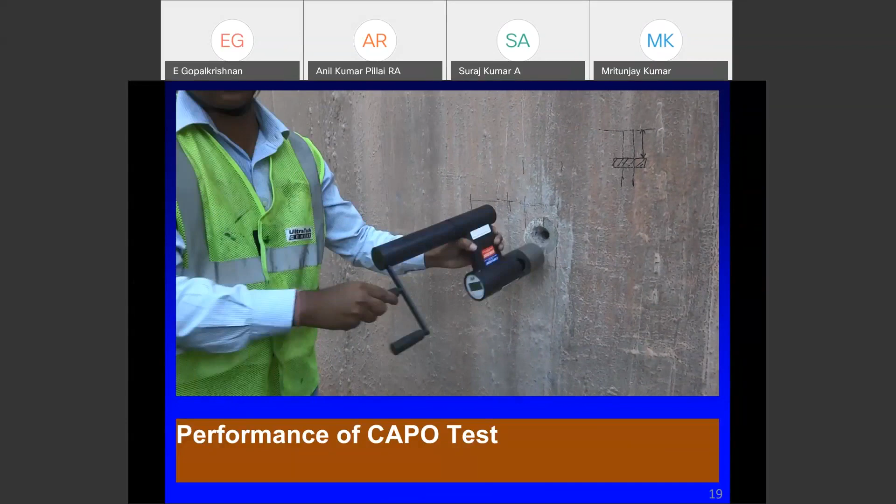Yes, now it has achieved the maximum force. 38.4 is telling that 38.4 is measured.

So if you see, the cone is broken, and we can see in place the damage is very, very minimal. We can repair it with an equivalent strength concrete mortar. The damage is very less.

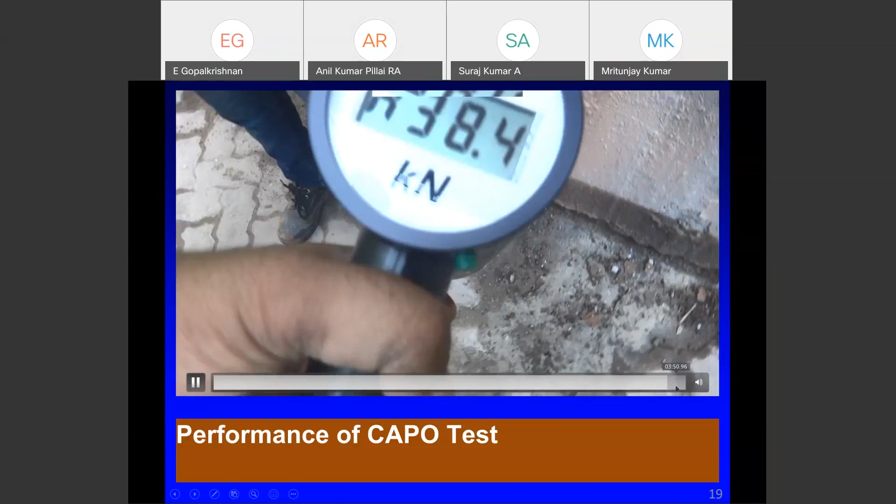Now I am going to tell you how to interpret this force, 38.4. Here I can show you that the damage is V-cone shaped that we have taken out from this pattern pull-out test. There is a curve provided.

We can say this is a correlation curve. The red line indicates for the cylinder and the blue line indicates for the cube. If you say 30 kilonewton, it's around 40 MPa measured on the curve.

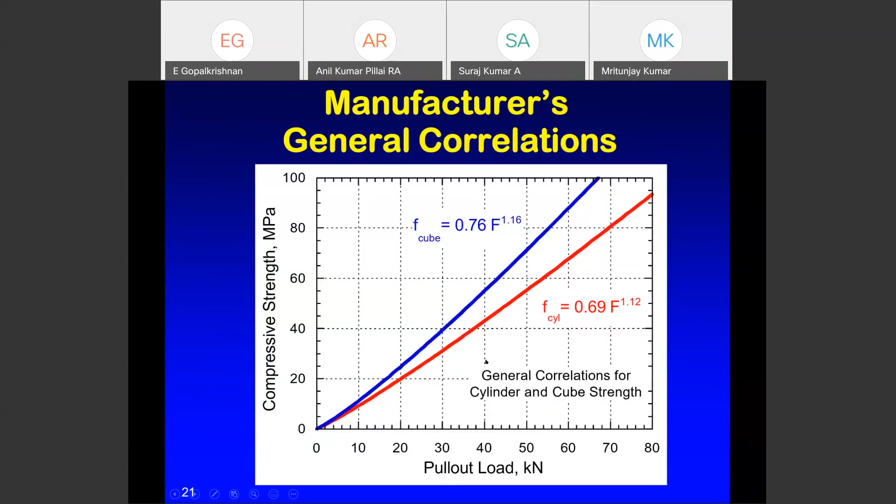Let me see, even if we use the formula, we can get a very close reading. 30 kilonewton - we are having 39.5. These are more accurate. So 39.5 MPa is equivalent to the cube strength.

So this way we can convert the force to the compressive strength. And this is all given by the manufacturer as per ASTM C900, but I wanted to verify it myself, so I did a couple of studies.

I cast cubes of M35, and when I compared the result of the pull-out test on the same cube as well as the same group, I did the compressive strength conventionally, so that I could get closer values. You can see the value is very, very acceptable, very close. This is one of the things.

Second, I did a comparison with the core as well as the cube. When I compare the core - wherever I did the CAPO test, adjacent to that I took the core - so that the compressive strength of the core should be matched with the CAPO test, the cut and pull-out test.

I can see that mostly it's very, very close, except one a little bit erratic result. So we avoid this result in the group, so that if you see, these two are very close. Similarly, when you compare the cube and the CAPO test, also very close.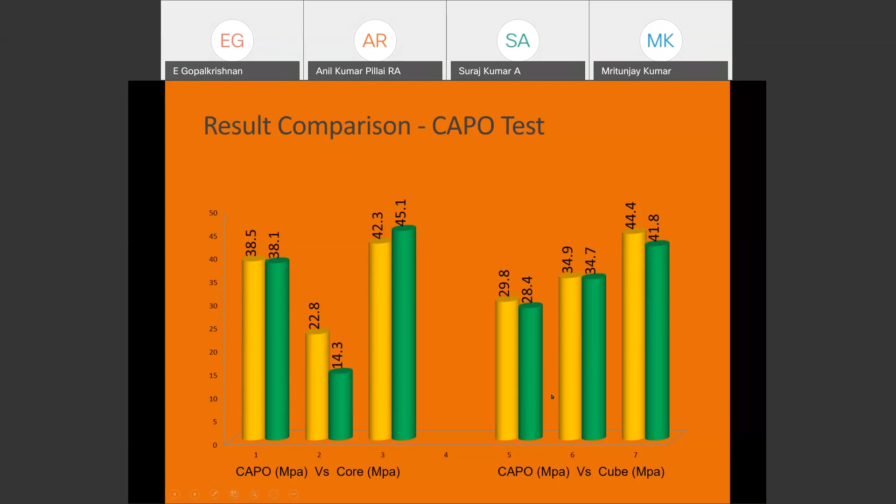That is a miracle of NDT, we can say. This is a non-contact method, not an intrusive method. All the NDTs - you can see even UPV or rebound hammer - you need to do surface preparation, smooth it and measure on the surface.

This one, you don't need to touch the surface. We can measure it from far away, 1mm to few meters or more than that, depending upon the accuracy or resolution of the instrument - infrared thermal imaging.

Do you know, IR cameras have been used to detect leaks in industries and commercials for a decade, and the result is fantastic. We have been using this technique for more than 6 years now.

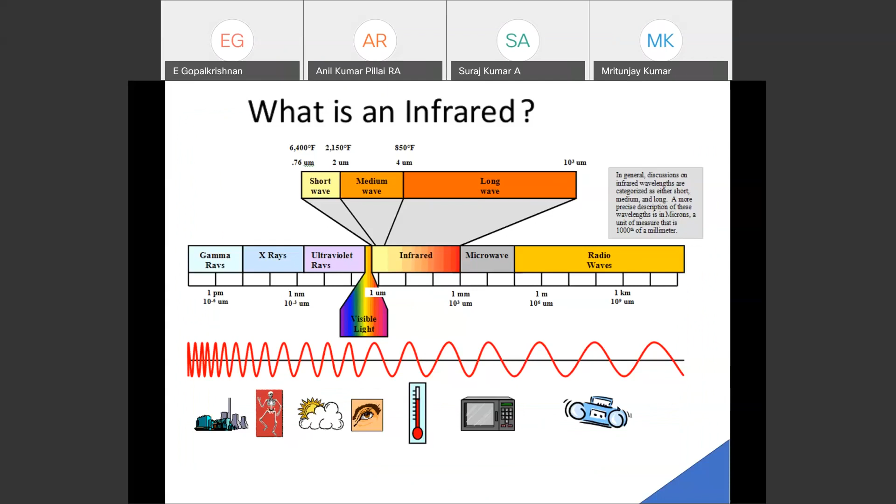For understanding easily: gamma rays, X-rays, ultraviolet, visible light, we can see. Infrared, we can able to see through this instrument only. We may not able to see through normal eyes, and the radio waves. This is called electromagnetic spectrum.

It was discovered by the British astronomer Herschel way back in 1800. Dispersing sunlight using a prism, Herschel accidentally found that there was an invisible light on the outside of red light, which increased the temperature of an object. So this electromagnetic wave was found by astronomer Herschel.

Nowadays, you can see in the airport where the screening is happening because of this COVID pandemic. Every airport, whether it's domestic or international, we can see the screening happening at arrival to see who is having the higher temperature. This is not for identifying COVID or something, it is identifying only the temperature. Based on the temperature, the medical practitioner will take further scrutinizing, screening the patient, or taking checks for ensuring that they are having high fever or not. That's all, based on that only they segregate. This is a given example for understanding this principle.

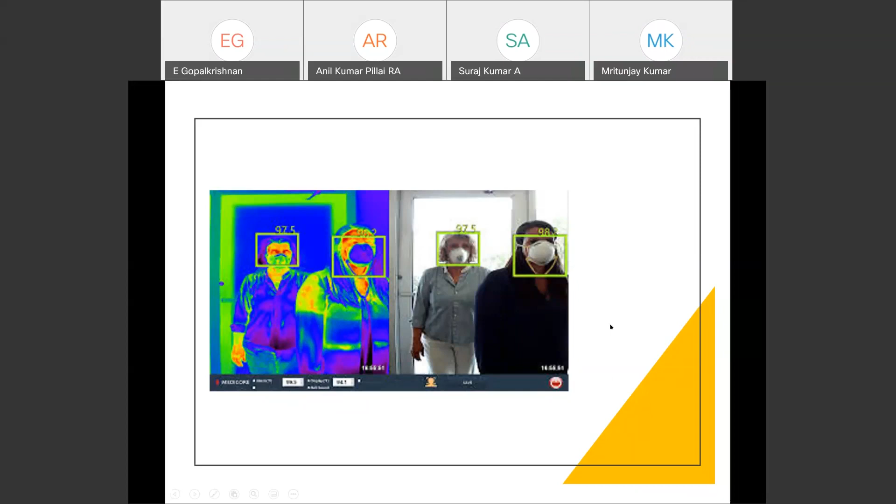Infrared thermal imaging for leak detection is an innovative technology to locate building leaks accurately in a short span of time. Very rapidly it can work. It can provide immediate visual results that can reveal the actual source of the leakages. The hidden building issues can be identified, even the delamination of the building can be identified very quickly.

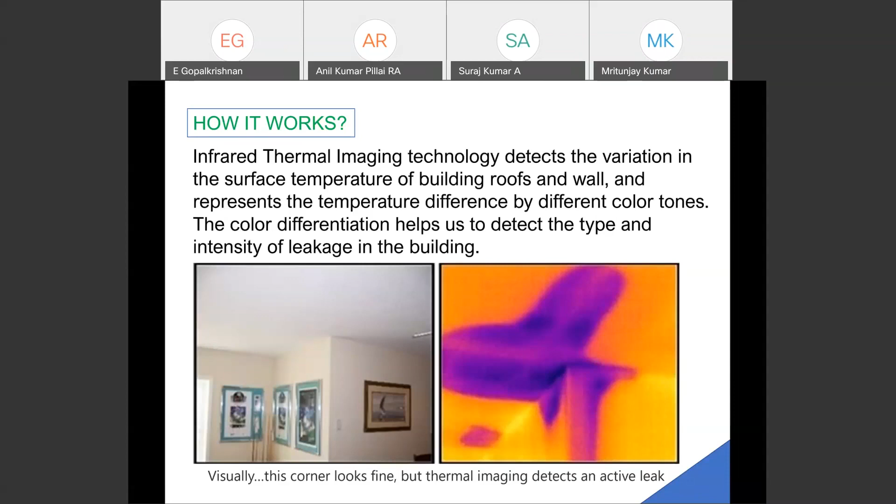Yeah, so this is how it works. So let us see an interesting case. I spent 3 days to understand the leakage of a swimming pool, which is a very interesting case study I'm going to share with you. Now you can see the tower, Iris Tower.

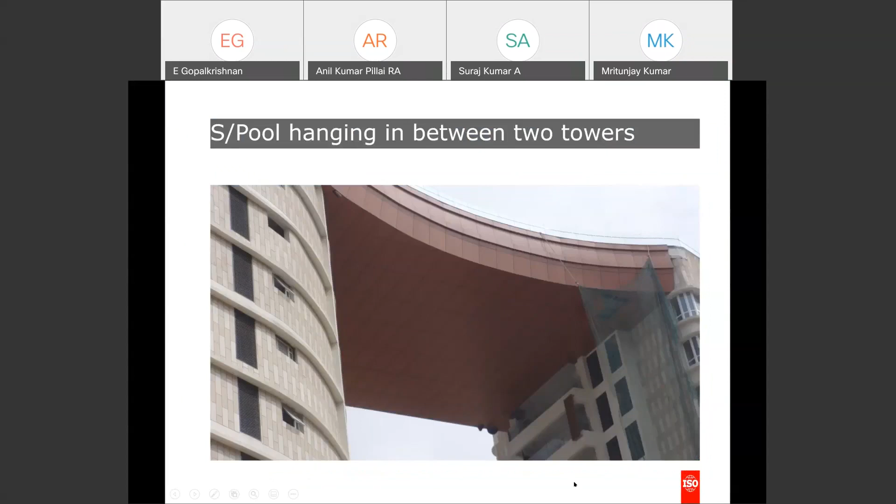There is a 13th floor, and there is a swimming pool in between two towers. If you see the close-up view of the swimming pool, once it's commissioned, after a month or so, it started leaking. It's leaking from the top, and the drop of water is falling from the 13th floor, making a hell of a noise. So from the bottom deck of the swimming pool, the leakage is happening.

When I got this job, I didn't know what to do, how to assess the leakage. When I tried to go inside, there was nothing, just a small trap hole. So we had to enter below the swimming pool, with only 650 mm of distance. We had to crawl down and see what was there, because the deck is completely covered underneath. So we cannot see anything, but we can see the leakage adjacent to the junction of the wall on both sides, so we don't know exactly where the leakage is happening.

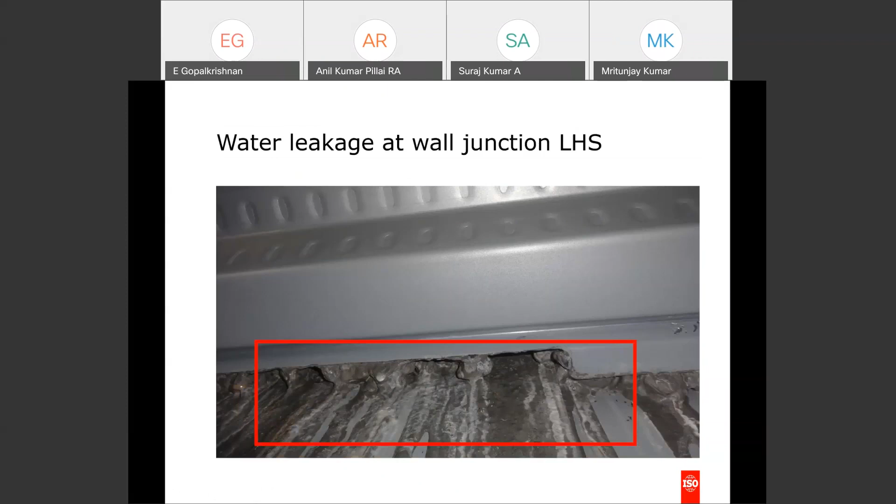They tried a lot of measures, trying to grout it in place, but it was not hitting the right point. How does this need to be solved? That was the challenge in front of us. So we spent 3 days trying to understand. We tried to ask about the history of the swimming pool, how it was constructed.

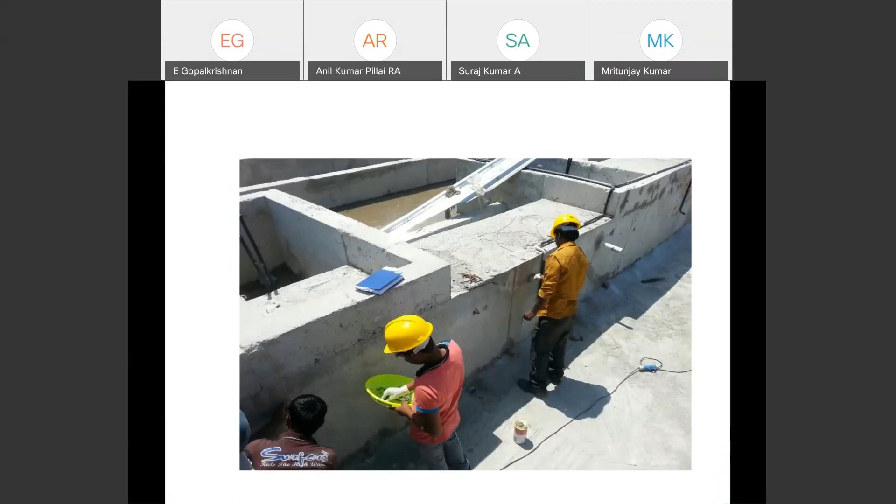They told me, yes, we finished the things from the beginning - the surface preparation, then spraying the liquid waterproofing membrane. It was heavy duty, having more than 700% elongation and tensile strength, and it's fireproof, impact proof, an excellent product. They also had protection to the waterproofing membrane, with geotextile and reinforcement, then shotcrete placed more than 150 mm thick.

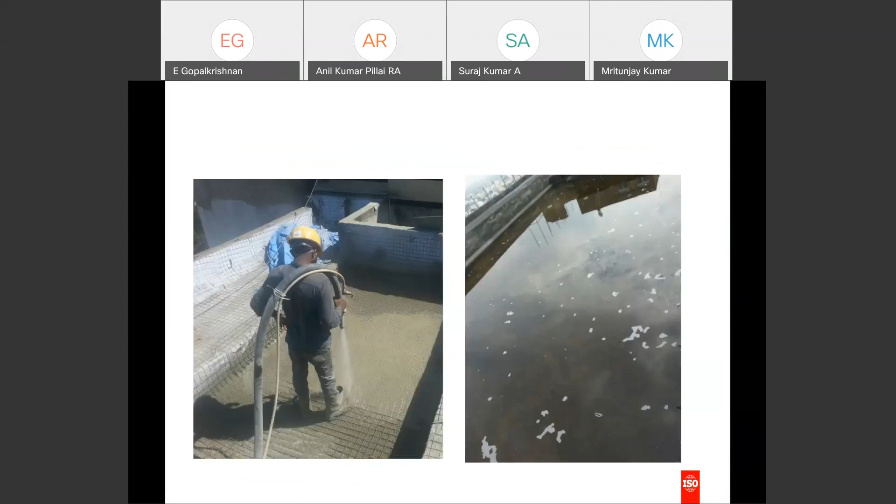So, all the things they had done to protect this membrane. Then they did ponding for three weeks, and not a single drop of leakage was found. Everybody was happy. Then they finished it decoratively with China mosaic tiles.

After some time, what happened? They started experiencing leakage again, with water falling down. Everybody could see it, and that created a big issue for the builder, who was not able to sell the apartments to other people.

So when we visited, we tried to identify the cause. First of all, we emptied the swimming pool and tried to understand if there was any damage to the wall, inlet, or outlet. We examined everything, and finally, after assessing, we were able to find that one of the outlets had a severe leakage.

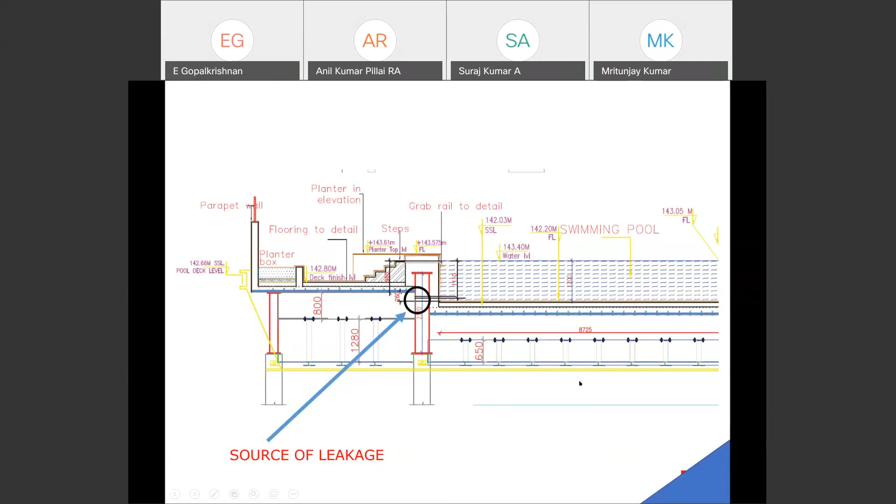So this was the source of leakage identified. Once found, we were able to correct it immediately and successfully complete the job. As an investigation agency, we suspect all the possible sources of leakage, and finally come to a conclusion on what the source is, then give the recommendation on how to proceed.

After completing the arresting of the leakage, we try to do the ponding test at one-third height and two-thirds height, and check whether there is any water dropping. Everything was done systematically, and finally they succeeded. This was a completed job. After that, the client was very happy, and they still take our help for any critical issue in a similar manner.

Now, time is already up, so I'm coming to the conclusion. If you want to test the mechanical properties, if you want to know the compressive strength, we do the core test or rebound test, pull-out test, or Windsor probe test.

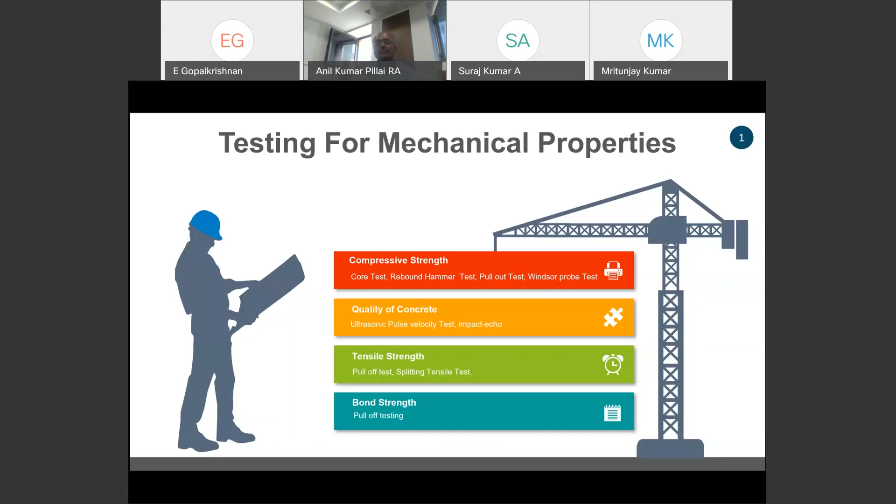If you want to know the quality of the concrete, we can use ultrasonic pulse velocity or impact echo, impact pulse response, etc. If you want to know the tensile strength, you can use the pull-off test or splitting tensile strength. For repaired surfaces, if you want to know the bond strength, you can use pull-off testing to understand the bond strength.

Similarly, chemical properties are required to know about supplementary corrosion-related and carbonation-related issues. If you want to know the electrochemical activity or corrosion activity, you can do half-cell potential, electrical resistivity, or rate of corrosion testing. If you want to know the carbonation depth, you can do the simple phenolphthalein test to understand the depth of carbonation.

Petrography examination and infrared spectroscopy help understand the carbonation level. For alkali-aggregate reaction or alkali-silica reactivity, you can do petrography examination to understand the parameters. Chloride content can be obtained through chemical analytical methods to understand chloride ingress and chloride presence in the concrete, which mainly attributes to corrosion activity.

How to interpret the result? If you are having common tests like UPV, rebound hammer, this can be misleading sometimes if you are not interpreting it correctly. When you get a high UPV and high rebound number, it may not mean there is more corrosion.

If you are having a medium ultrasonic pulse velocity with a low rebound hammer reading, it could indicate surface delamination or low quality surface concrete, or this may be a corrosion-prone zone. We need to assess further with more NDT techniques.

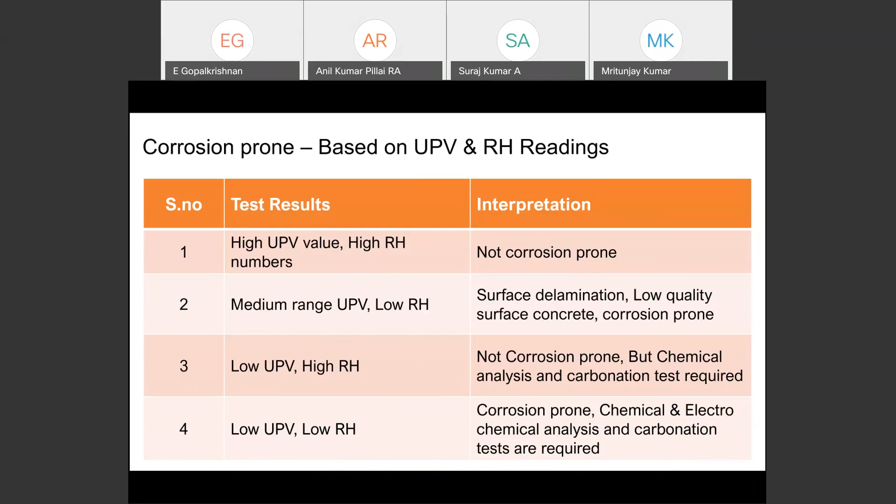Similarly, based on cover thickness and corrosion risk: adequate cover thickness with good quality concrete is relatively not corrosion-prone. Adequate cover with bad quality concrete is corrosion-prone. Less cover thickness, even with good quality concrete, is also corrosion-prone. So we need further tests to ensure the corrosion activity and the probability of corrosion.

The availability of a wide range of non-destructive testing equipment has made it easier to monitor the quality, distress, or durability of concrete structures. Non-destructive testing instruments have proved to be reliable and invaluable. However, interpretation of this requires a competent person to arrive at an acceptable evaluation of concrete regarding its quality and strength.

Diagnosis of defects and condition assessment are essential prerequisites for a successful concrete repair. Without assessing, if you start the repair, there is no end to it; we will be doing it again. If you want to identify the issue and the depth of deterioration, you can achieve a successful repair.

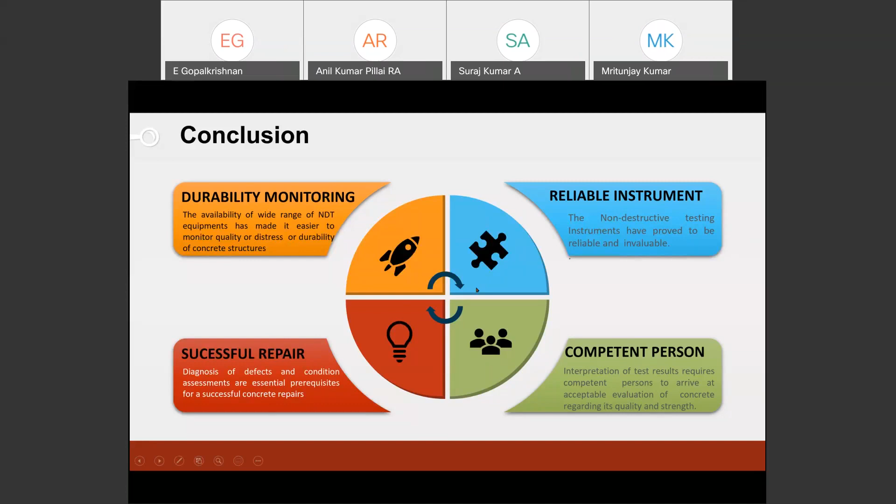Before concluding, don't replace, repair in place. I want to give this message towards the end of the presentation. Thank you very much for listening patiently.